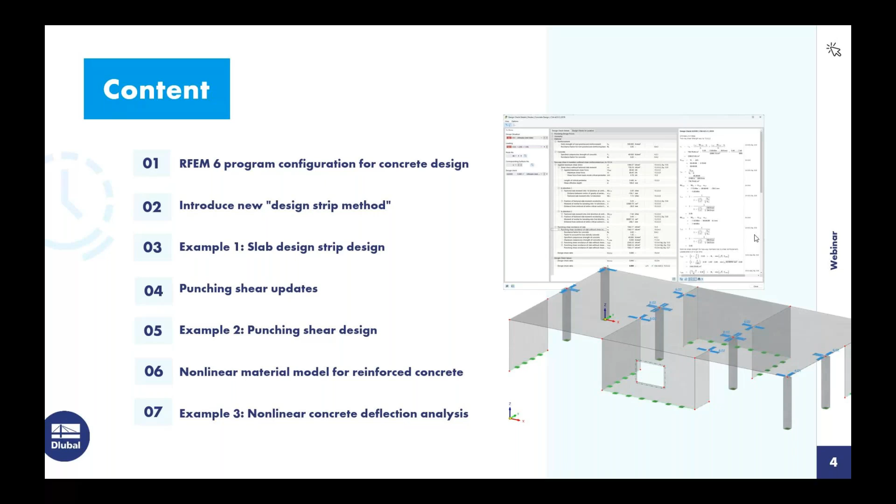So for those of you joining us today who are not familiar with RFEM and our concept, we do work with add-ons. So when we look at the base program RFEM 6, this allows us to fully model our structure. We have access to all of the materials, the cross sections, not only for concrete, but all of the other materials that we offer as well to get a full analysis. But when we want to carry out the design, for example, of our members or our surfaces, we do need the concrete design add-on. And this includes the ACI standard, the CSA, and other international standards.

We also have the building model add-on. So this is going to be used in conjunction with the concrete design add-on to carry out the reinforcement design of these building specific features such as shear walls or deep beams, otherwise known as spandrels. So we won't be getting into this add-on today, but I did think it was worth mentioning. We have a previously recorded webinar that goes into much more detail that you can refer to on our website.

We also have the nonlinear material behavior add-on. We'll see this in our third example today, but this is going to allow us to consider the nonlinear behavior, again, of the concrete and the reinforcing steel directly in the analysis. Now, there are many more add-ons that could be applicable that we offer, for example, construction stages analysis. We'll briefly mention today the time-dependent analysis that might be interesting for concrete design for a more detailed creep and shrinkage analysis. So you can refer to our website to see a list of all add-ons available as well as their functionality. So moving on to our first topic today.

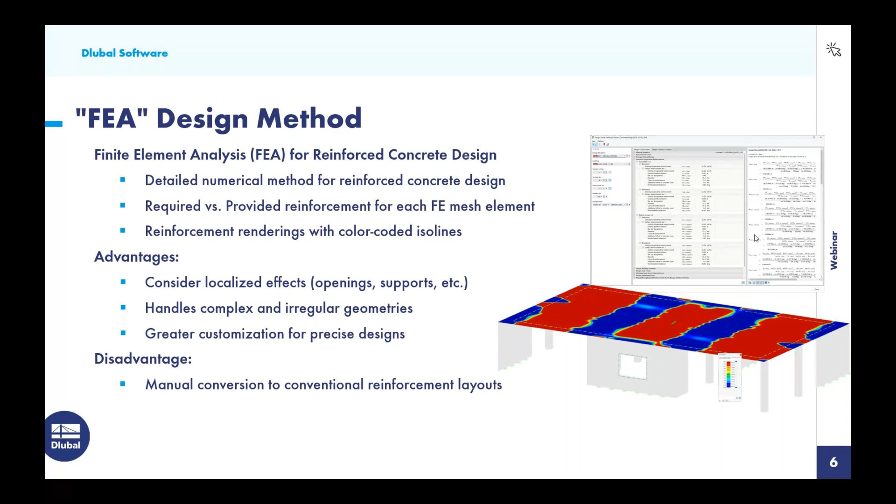Now, the disadvantage we could argue here is that it's not great for reinforcement layouts, that we have to take these color-coded isolines and somehow convert them to standard reinforcement layouts that we would want to include in our detailed drawings or output.

So therefore, we're excited to announce that we now offer this alternative method, the design strips. This is a simplified approach to reinforced concrete design, where essentially we take this surface or slab element, we divide it into strips, and these strips can be generated automatically according to the standards, or we could manually generate them as well.

What's happening underneath the hood is that we're using this RFEM member type called a result beam. And a result beam is going to sum up the internal forces such as moment and shear across the width of that particular design strip.

Now we can further take the design strips into the concrete design add-on within RFEM to carry out the full reinforcement design. Again, a little bit more simplified like a member as opposed to this FEA approach.

So the advantages here is that it can be very efficient and straightforward for standard slab geometry. When we have very rectangular type surfaces, this could certainly be a very easy way to carry out the design. It's also widely accepted and will produce standardized reinforcement layouts.

And we'll see this in our example today, just how the output of the reinforcement can be a little bit more user-friendly. The disadvantages we might want to mention here is that we assume uniform behavior across the strip width.

So we're kind of averaging out or summing up those forces across the entire strip width. So we're going to ignore localized stress concentrations or significant variations in the stress distribution. So perhaps we have an irregular slab, areas with complex openings, complex geometry, non-uniform loading, where maybe we really need to focus on the details at some of these locations rather than averaging out over the entire strip width.

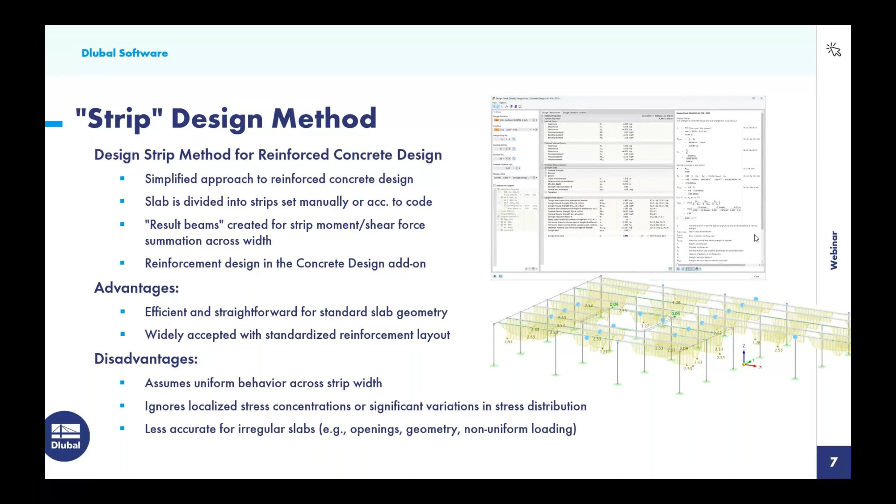So with that said, we will move into our first example today. I will begin here within the program RFEM and opening up the base data dialog box. This would be the dialog box that would be available when we create a new model.

Under this second tab are all of the various add-ons. So essentially you're creating this custom software package that's specific for your design needs. We will be utilizing the concrete design add-on here, so it's currently activated.

And then under the third tab, this is where we can set our standards. So we can generate the load combinations automatically according to the ASCE 7, the latest 2022 standard. And we will be carrying out the concrete design for this first example according to the ACI 318, the 2019 standard, but notice the CSA is also available within this dropdown.

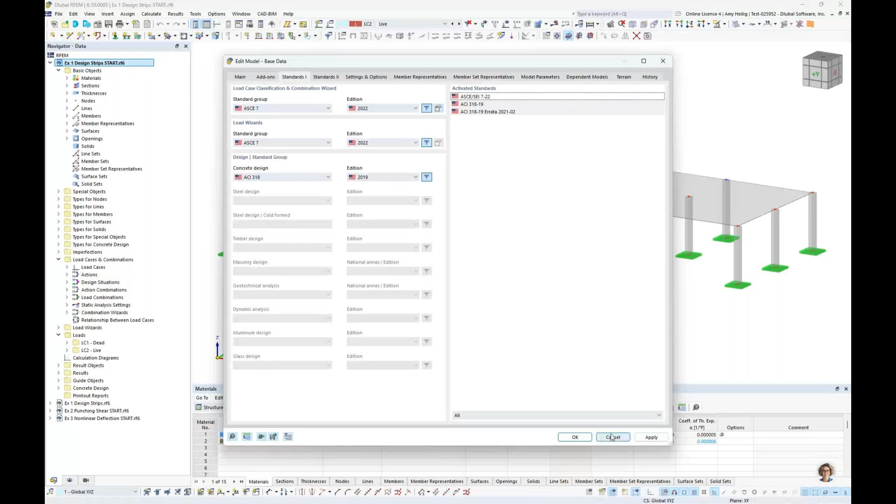So once this information has been set, let us just do a quick model review. Looking at the materials, standard 4000 PSI concrete is applied to this general structure over here. And we have just a single surface element.

We have our columns laid out for the 4000 PSI concrete, pretty uniform, pretty standard geometry here. Looking at the thickness of this surface, it is going to be 12 inches.

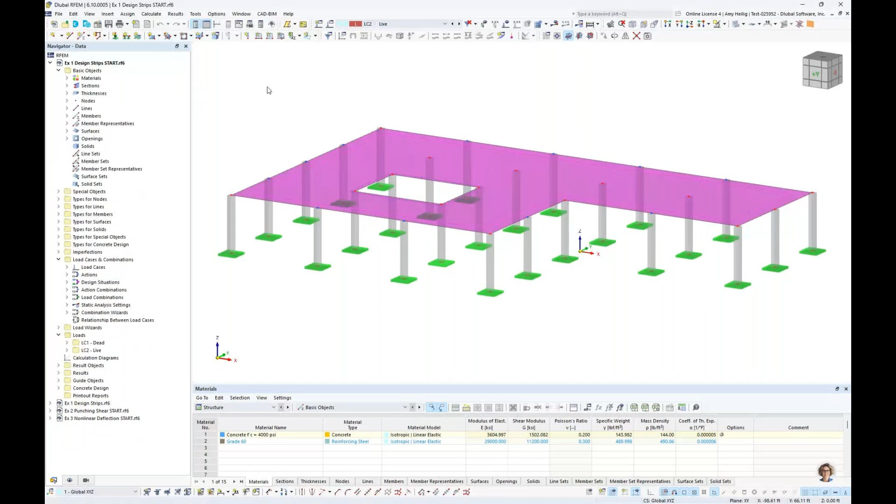So looking at the loadings now, just a couple of very simple loads for today, gravity only applied to the surface element directly. So we have here a dead load. It is considering that opening there in the center, 0.1 kips per square foot. And then I also have a live load applied.

And rather than applying the live load to the entire surface, I did take advantage here of the loading options, new free rectangular load. So this allows me to place loads on various areas of the surface without applying it to the entire surface itself.

So going into the load cases and combinations dialog box, we are generating the load combinations automatically according to the ASCE 7 with this combination wizard turned on. We can always deactivate this if we would like to manually create those load combinations.

But here are the separate dead and live load cases. Notice self-weight is activated for the dead load case only. But one other thing I wanted to quickly point out here is this structure modification is activated. So this all has to do with the I crack factor that is required from both the ACI and the CSA standards to be applied to members and surfaces.

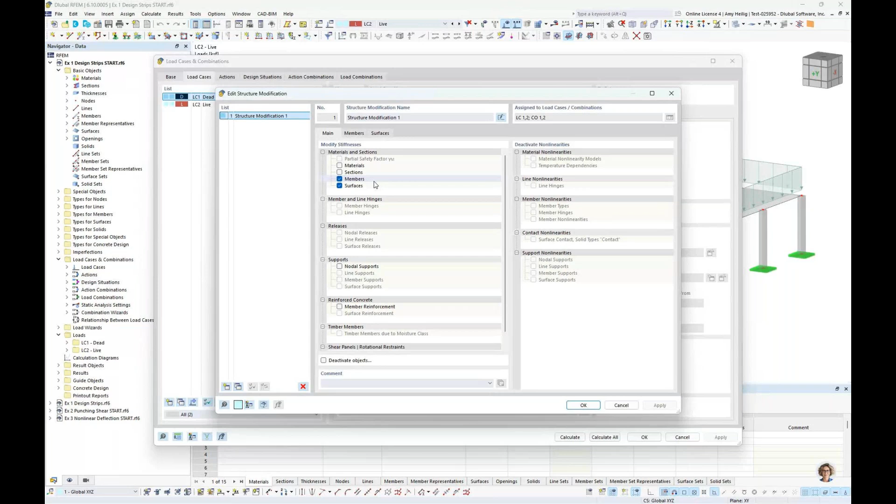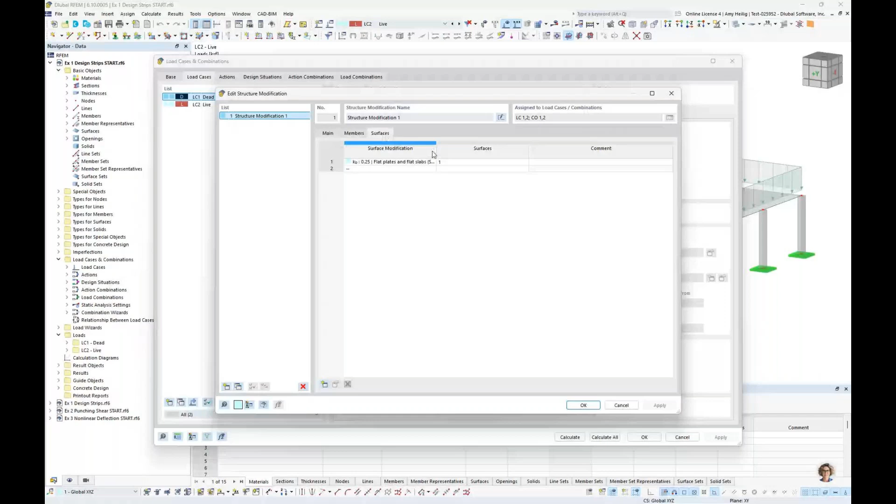I have already created this I-crack factor to be applied to the column stiffness. You can see ACI selected directly from the dropdown. We also have the CSA standard, where this bending stiffness multiplication factor of 0.7 is applied to the columns. We also have the I-crack factor applied directly to the surface, with ACI selected from the dropdown and the bending and torsional factor set to 0.25.

Now that those structure modifications have been set, we apply them to the load cases. Under the design situations, we generate two design situations according to ASCE 7: factored load combinations for the strength limit state design, once we get into the concrete design add-on, and unfactored load combinations for the serviceability design. I have activated the structure modification for the I-crack factors only for the factored load combinations, not for the serviceability load combinations.

Jumping to the load combinations themselves, a very simple example today: two load combinations, with the structure modification activated for the factored load combination, and the unfactored load combination belonging to that second design situation.

Now that we have done the model and loading review, we want to move forward with generating the design strips. What we need to do is activate a building grid. This 3D building grid will help guide the program in automatically generating the design strips for us.

This is not to be confused with our drawing grid, which we normally set visually to help with modeling. Rather, under the guide objects, you will see the building grids available, where we can right-click to create a new building grid definition. There are some other building grids set by default in the program that we could use and modify, but I just created a new one.

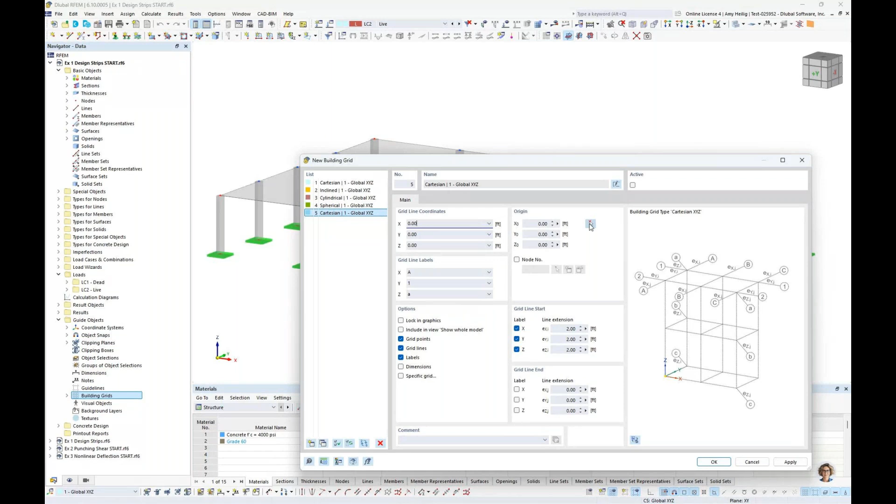This is going to be in 3 dimensions, aligned with the global XYZ axes in the model. The first grid line in the X direction will be set at 0. We also want to set the origin point—rather than the point 0,0,0, I can graphically select this point in the lower left of the structure, and now we see those coordinate points populate here.

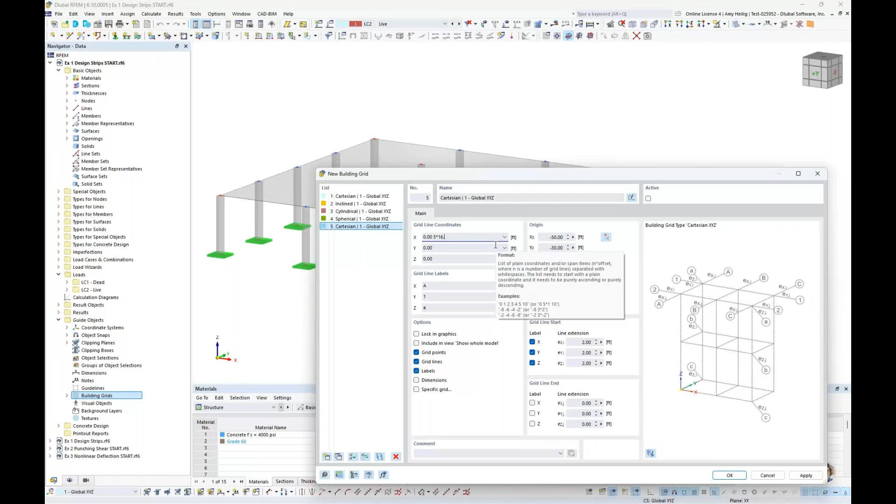We start off with the point 0 in the global X direction, and then I'm going to have 5 more lines spaced every 16.6667 feet. These columns are laid out identically here at approximately 16.67 feet, so we can create those additional lines in that direction.

Same concept for the global Y axis: our first line will be at 0, and then we'd like 4 additional lines at 12.5 feet. Finally, in the Z direction, we have 1 line generated at 0, and then vertically, 1 additional line generated at 10 feet, which I can just type in directly.

Once we are done defining this, we see that 3-dimensional building grid laid out here. This is required in order to move forward with our second step of generating the design strips.

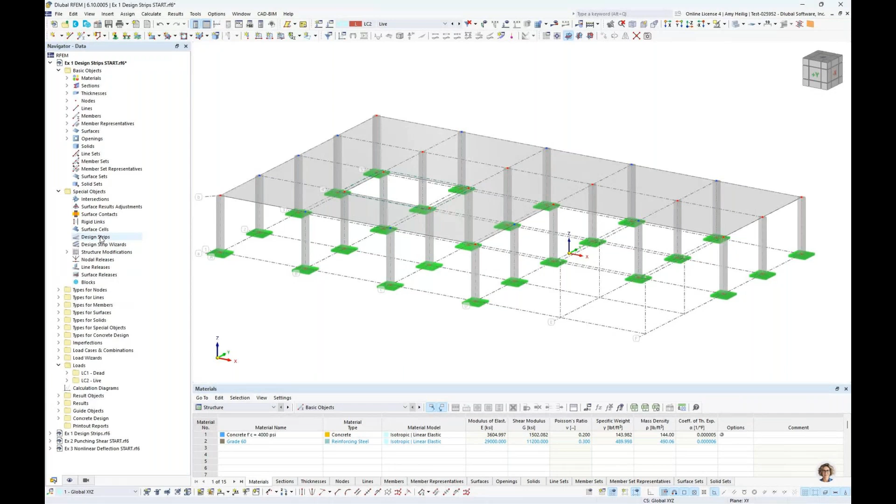The design strips are created directly in the base program RFEM—we don't necessarily need the concrete design add-on yet to generate those. Under the special objects tree, we see this new design strip wizard. We go ahead and double click on this, and you'll notice the program asks for the building grid we just created to be selected within this dropdown.

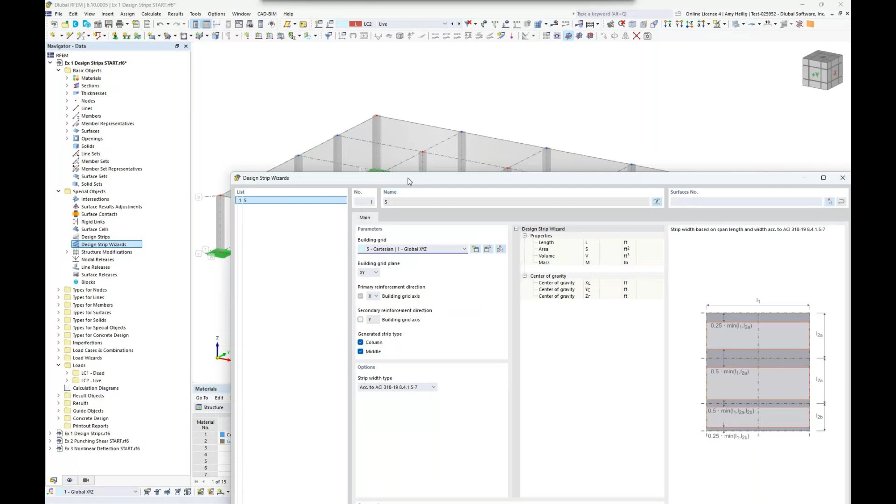We want to generate these design strips according to the building grid plane XY, or the plan view looking down on the structure. We have the ability to generate design strips in two directions, which would be something we'd want for our reinforced concrete design of the elevated slab. But for this example, I'm only generating the design strips in one direction, the building grid axis X. The generated strip types will include both the column and middle strips.

Within this dropdown box, we have the ability to generate the design strip width according directly to ACI section 8.4.1.

And this picture will dynamically update depending on which option we have selected here, but it is going to refer to the span widths in both directions, which is directly set within the ACI. We will be adding the CSA standard within this dropdown as well. Just for your information, it's identical to the ACI, but nonetheless, we will add it here within the dropdown.

We can also select here based on the span width. You can see how the picture updates here to generate the width based only on the span in one direction, or we can choose user defined. So if you want to generate the same width strips throughout the structure, you can just directly input in that strip width. So moving forward with the ACI 318 today, we do want to tell the program which surface to

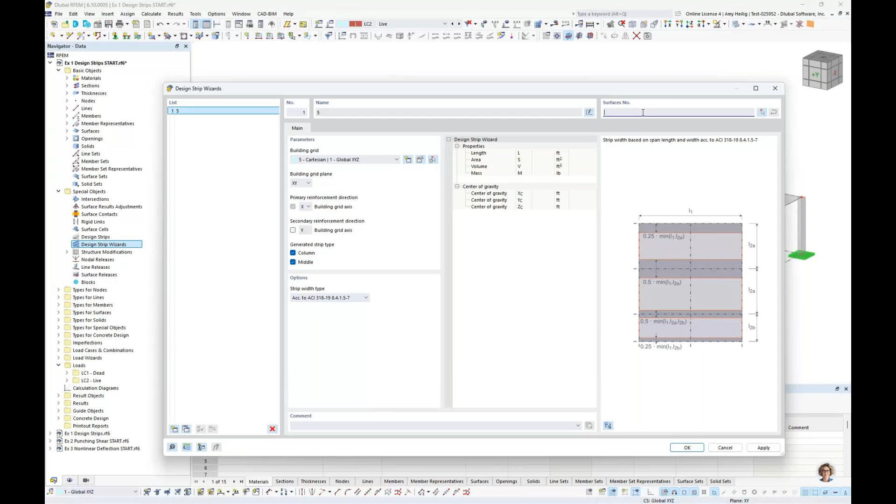apply this to. So we can graphically select here surface number 1 or simply type it in. We click OK, and now we see those design strips generated here. All the design strips are listed right above it in the design strips tree.

So if I wanted to make any modifications to each one of these design strips, they're currently tied to the wizard. So that's why they're shown here in purple. If I wanted, I could always right click to disconnect the design strips, and that will allow me to individually modify, for example, the width of any of these design strips if I wanted to make further changes.

So what's going on in the background? Well, with one of these design strips, if I double click on it, what it's essentially creating is the member type design strip here. And it's not editable. Again, that wizard has created this specific member type, but it's really doing exactly what I mentioned in the PowerPoint

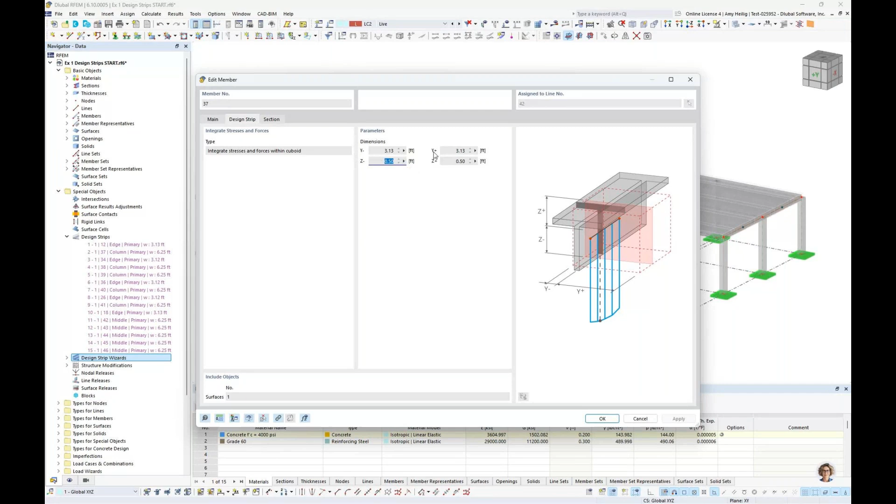with the result beam. So this is another member type we offer in RFEM called a result beam. It is summing up those internal forces over the strip width and also considering the thickness of the surface here, all automated. So that's how the design strip is being generated here with that particular wizard.

So if we go into the design strips dialog box here, again, these were all created by the wizard. If we wanted to create additional design strips, we could in the lower left-hand corner. This allows me to set the strip width individually. I could then graphically select the line.

So we must have the line drawn across the surface to assign this design strip to, as well as the relevant surface. So that is an option here if perhaps the wizard didn't capture all the design strips that we wanted for our particular surface.

So looking at all design strips at once, we're going to carry out the reinforcement design utilizing the concrete design add-on because this checkbox is active. So we then have this second tab available to us here. And this is where we set the reinforcement for both the top and the bottom of these design strips.

So starting off first with the top, we can automatically determine the number of bars that will be needed at the top portion of this design strip. Perhaps though we do want to specify the bar number, so we'll select number 6s here.

We also can automatically determine the spacing, and we can control here the parameters for the spacing for the program to help determine this. For example, we can set here the minimum spacing between our reinforcement to 3 inches, maybe the maximum spacing is 12 inches, and the increment is every 1 inch. And we can click OK. So that will be applied to all of our strips here.

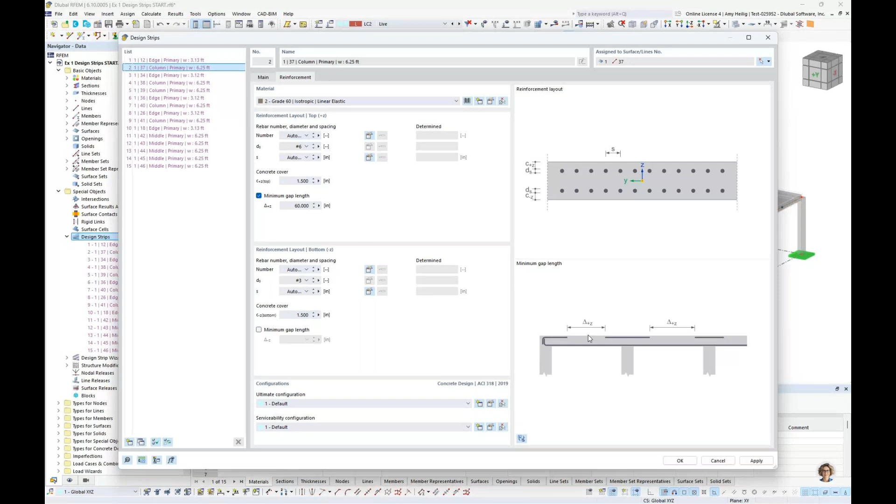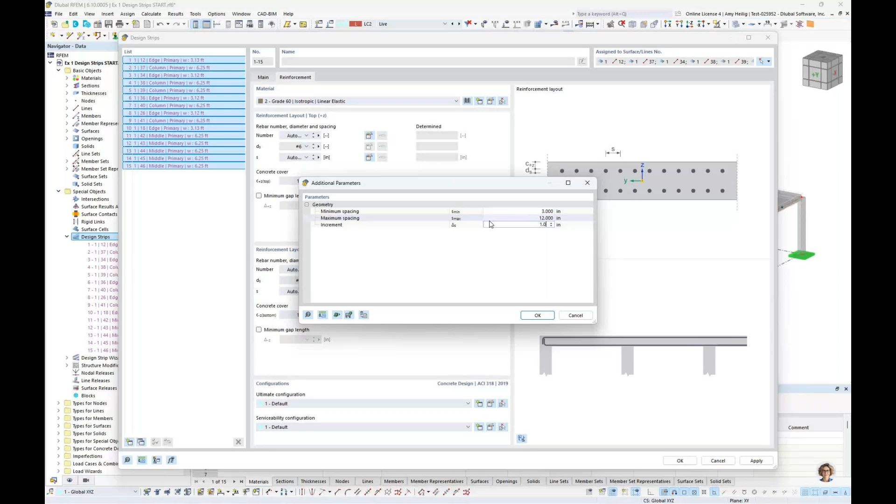Now, if you want continuous reinforcement across the entire top, we would go ahead and turn that off here. Now, looking at all of our design strips together again for the bottom reinforcement, exact same concept here. We will select number 6s if we wanted to modify the spacing parameters to 3 inches as the minimum, to 12 inches as the maximum, and to optimize with 1 inch spacing increment, we can click OK, and I want continuous reinforcement across the bottom.

So here are the configurations, and the configurations when we run the concrete design add-on are always applied to members, to surfaces, to design strips.

We'll see this in our next example with punching shear. This is just going to be information that is specific to the standard we have selected, which is currently the ACI for the ultimate limit state design. And the design strips are designed here according to this first tab for members. So for example, if I'm not so interested in considering the torsional moments within these design strips, it's not so important for my surface design, we could completely turn that off here. All the rest pretty self-explanatory with code references that we can make modifications to here.

Looking at the serviceability configuration. So this just has everything to do with our serviceability design once we do get into that add-on. For example, crack widths. Perhaps I don't want to calculate the direct crack width calculation according to the Gergely-Lutz equation, but rather I would just like to use the reinforcement requirements directly from the standard. We could go ahead and turn that off and leave this top option checked. Also, some limiting deflection ratios are also set here within these options.

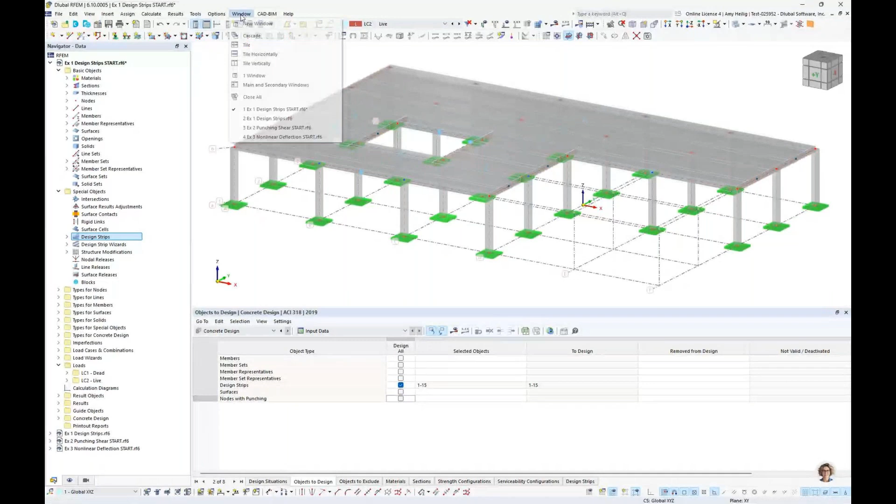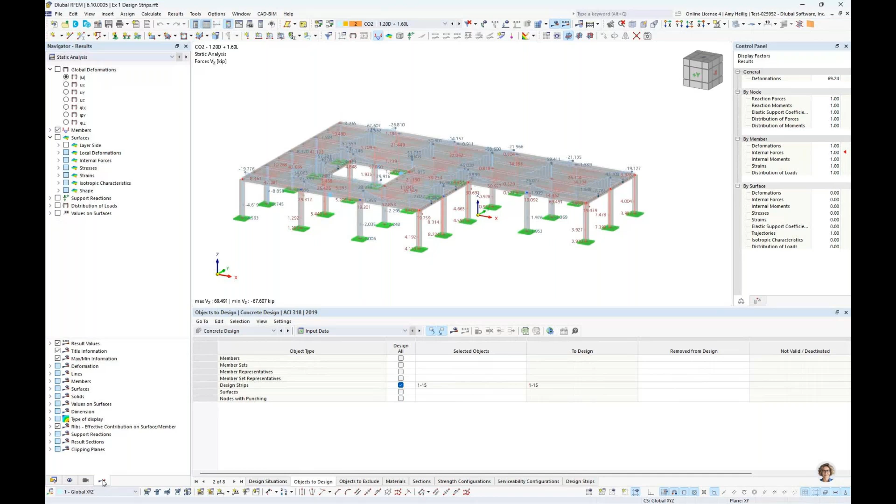I will jump to an already saved model. It doesn't take very long to solve, but just for the sake of time, we'll jump over to the calculation already solved here. So once this calculation is complete, let us take a look at first the analysis. So we can take a look at our factored load combination here, the dead plus the live load. And we have a new tab available in our navigator over on the left where, for example, we can view the analysis results such as the deformation.

But we're really interested in those design strips. So remember, we're technically treating these as members running along the length of the slab here. So therefore, we can activate the member internal forces for the entire model. And I'll go ahead and create a user-defined visibility here only for this top portion. So what you'll see here is that we can activate the member internal forces, such as the bending moment. So again, these bending moments are determined because they are summed up across the entire strip width.

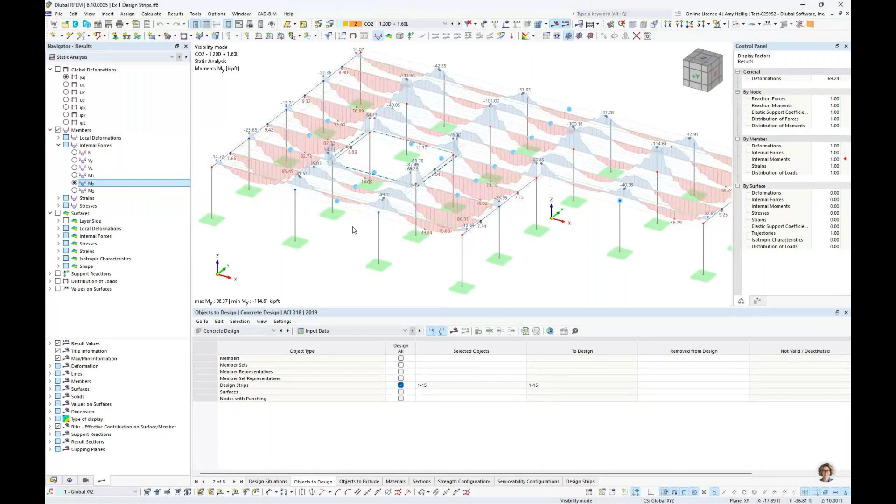So it's real easy now to determine here the total internal forces from this analysis of load combination 2, kind of represented here as a member along the design strip length. We can also take a look at the shear forces, and as expected, we have higher shear forces maybe where these columns are located or at the opening edges, but again, summing up those internal forces across the design strip width. So now we would like to turn to the concrete design results.

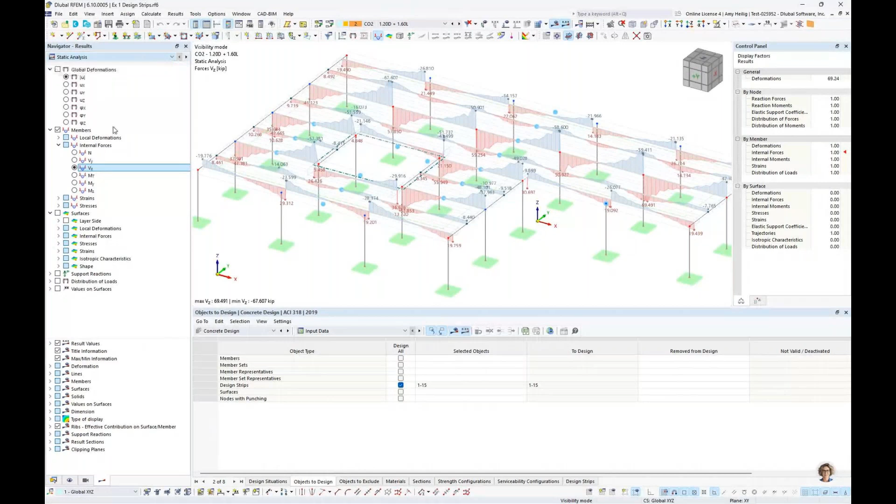So in our navigator, we can use this drop down. So not only are we interested in the analysis, but now we turn to the actual design according to the ACI standard. So under the concrete design table, we can view the design ratios on the design strips themselves. And what we will see here in table format is we certainly do have some design strips that have some failing checks, and no surprise, it's the shear strength, pretty close to some of where these columns are located. This is actually something that we would address later on when it comes to the punching shear. So these failing design checks are nothing to be concerned with now, but rather we'd be more interested in maybe the flexural design checks that are also given.

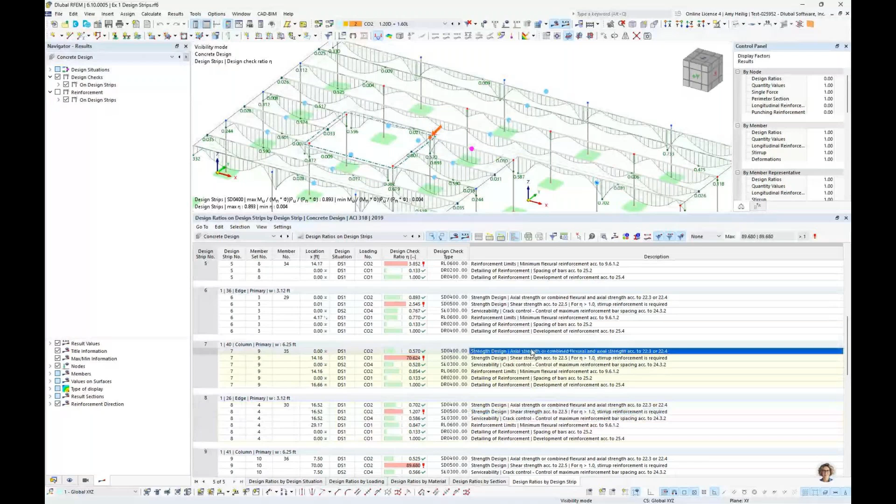So with each design strip, as we can see, the program will kind of highlight which one we're currently looking at. We can always access the design check details. With the design check details, we can zoom in here. This is going to show us the formulas line by line and ultimately how we have calculated this design ratio for this particular strip.

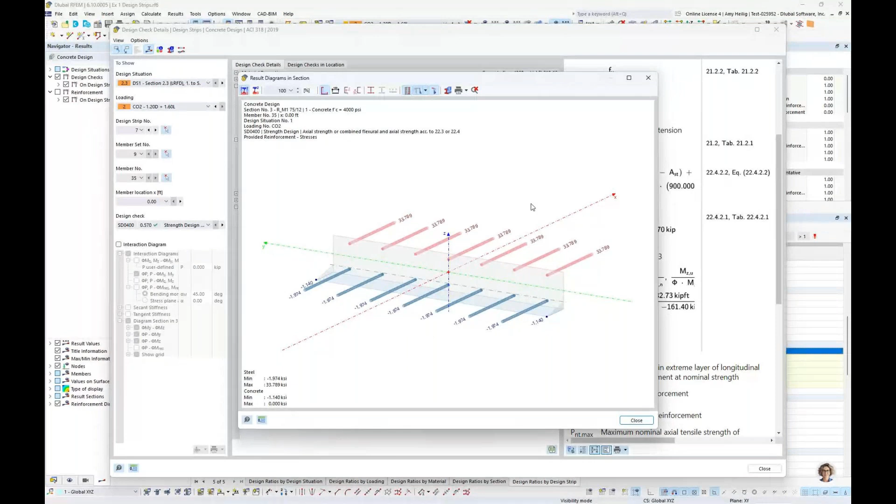All the information is also shown in table format, and we can even pull open a cross-section view here of that strip to view the reinforcement at the top in tension, and the reinforcement at the bottom in compression at this particular area, likely located over our column.

So that's a little bit about the table options that we can view here for our results of the design strips. Keep in mind that everything is also visible to us here graphically. So we can activate here the strength limit state checks directly within the model to see the design ratios along each one of these design strips. We also can view here the reinforcement.

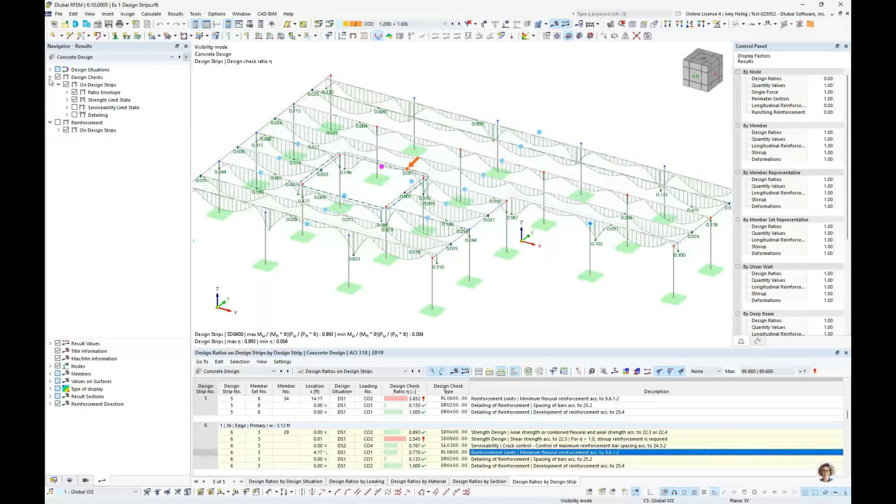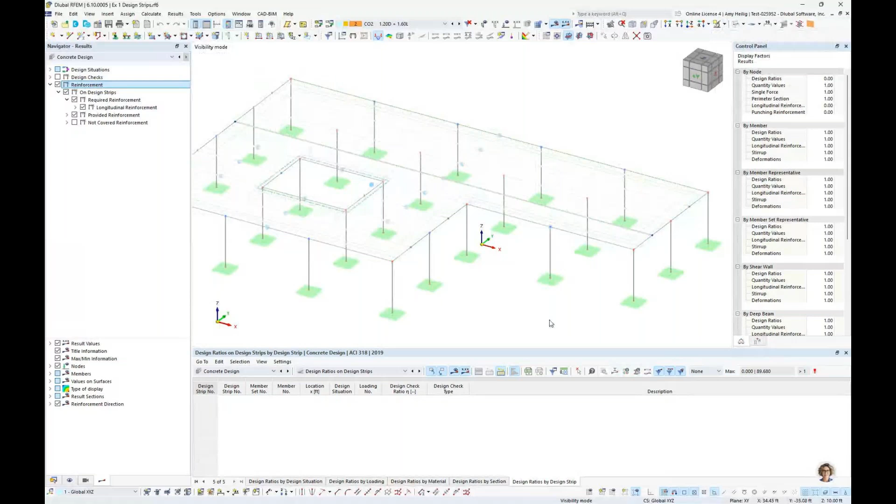So if we activate the reinforcement here, I'm actually going to choose one of these design strips and we'll choose the visibility based only on this particular design strip. And let me cancel out this visibility. We'll try that one again. Okay, and it's still not activating, give me 1 second. What we want to see here is the required longitudinal reinforcement specific for this design strip.

So we can also jump down to the reinforcement on the design strips in table format. And the one that I'm most interested in is number 14 here. So with this particular design strip running between these two columns, we can activate the required longitudinal reinforcement for the top of this design strip. So we can see here along the length what the required reinforcement is.

And with that we can overlay here the provided reinforcement. So the whole goal is that the provided reinforcement is greater than the required reinforcement. And in table format, under the reinforcement on design strips, we can see here that 7 number 6s are provided for this particular strip.

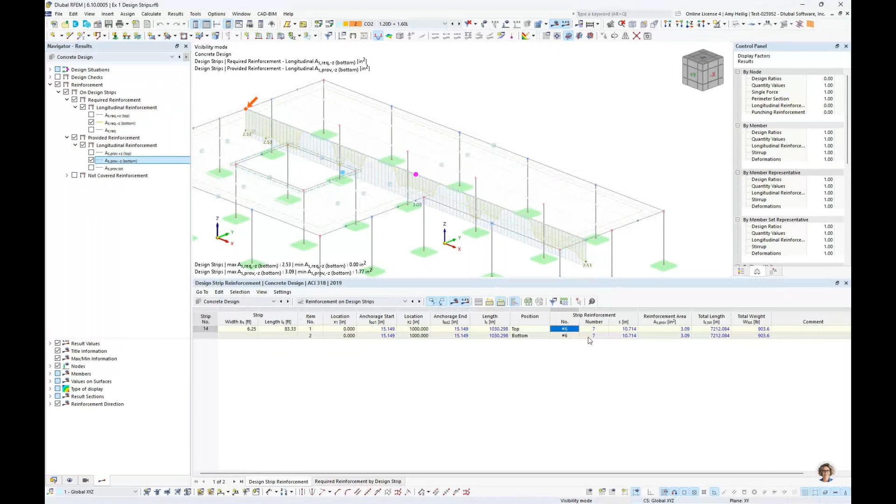Taking a look here at the bottom reinforcement instead. So again, we see the required reinforcement from the analysis displayed graphically here for design strip number 14. And we want to overlay on this the provided reinforcement. This is also 7 number 6s that the program has determined. We can see that this value is greater than the required reinforcement. So everything looks quite good here.

Again, if we cancel out of this visibility mode, we're going to see all of the number 6 bars, the numbers, the spacing that has been generated by the program automatically with the strip design. Also, material takeoff is available in this table format that we could export directly to Microsoft Excel with this button here. Okay, so that is a general overview of the new design strips and how we can carry out the design according to the ACI or CSA standards.

We're now going to turn to our second example to discuss punching shear. So with the punching shear design, we are referring to ACI 318, section 22.6 for two-way shear strength. When it comes to the CSA, we're referring to clause 13.3.2 for one-way and two-way shear.

As I mentioned earlier, we have carried out the punching shear design for quite some time in RFEM and the concrete design add-on, but we were only able to do this without the two-way shear reinforcement considered. So we would just flag you as a user if the strength of the concrete alone was not sufficient, but had no way to really address that further without the input of the shear reinforcement. But now we have that ability to define that here at the punching shear nodes.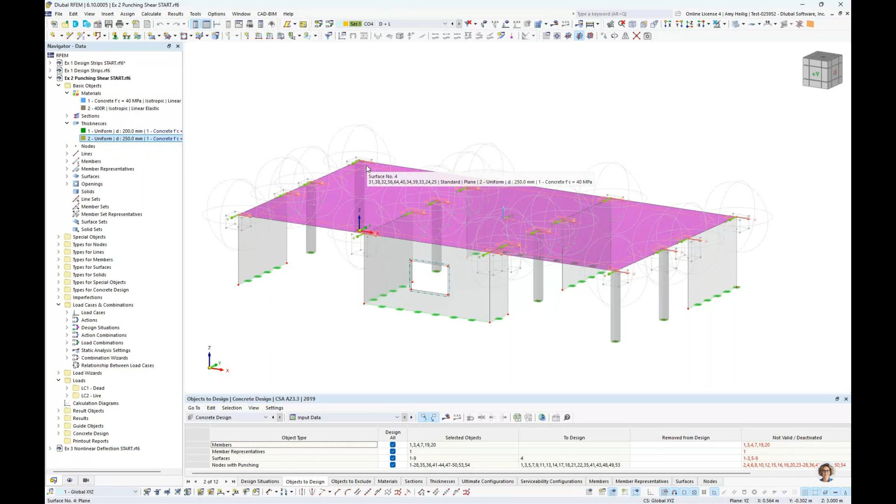But because I'm going to carry out the design according to the FEA method of this elevated slab, inevitably we're going to have what we call singularities. And singularities are not unique to RFEM. They happen in all FEA programs.

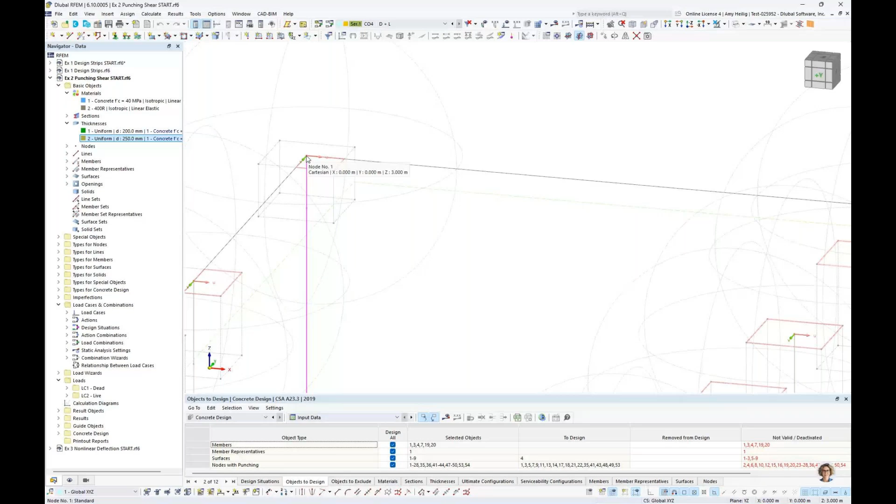And the reason why is because we have these column elements, for example, that are framing up into the 2D surface, and all forces are being transferred at this single FE mesh node. But we know in reality, we're certainly getting better load distribution than just that single mesh point, because our column is certainly going to have dimensions here. So what tools do we have in RFEM to address these singularities?

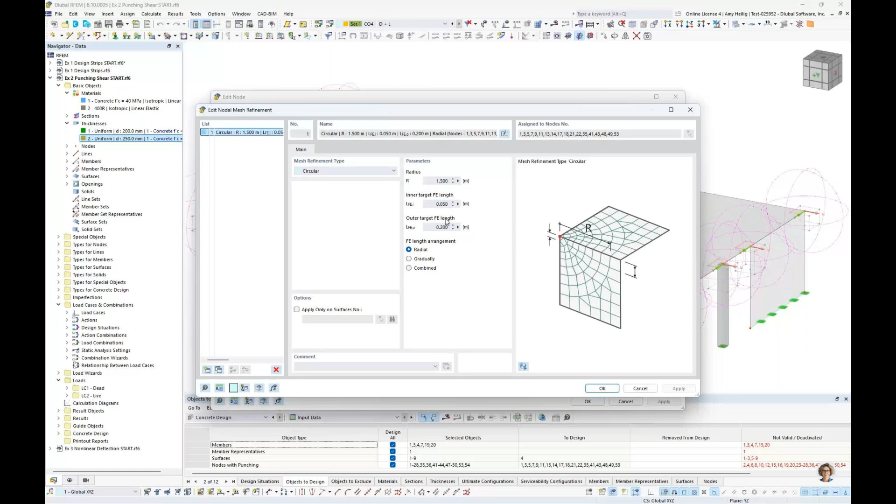Well, the first thing that I did is I selected multiple nodes at once. And if we double click them here, I've added in a mesh refinement. So we have the ability to add in mesh refinements for different objects in the model, including nodes. And we can take a look at here that I applied this single definition to multiple nodes where I have a radius set. I have an inner target FE length of 0.05. The outer is 0.2. And again, those were applied to all of the top nodes that you see here with the symbol shown.

What else you will see is the symbol shown here at the wall edges as well as the columns that are called our surface result adjustments. And these are given here under the special objects tree. We can see the surface result adjustments listed. I just created one definition type to begin. This allows me to average out or to smooth out the internal forces over a set dimension here.

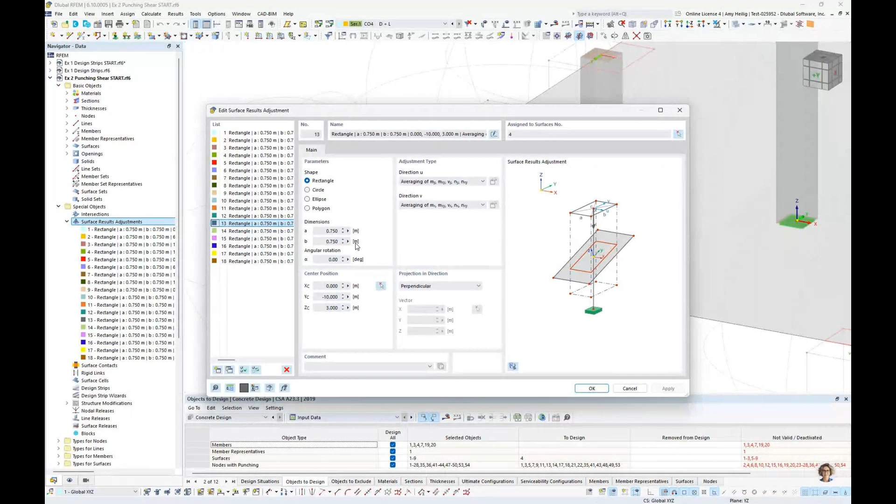So this is actually considered when we take this into the concrete design add-on, that we can average out the moments, the shear forces, whatever we want over this dimension of 0.75 meters by 0.75 meters. Again, this just helps with those non-realistic singularity issues where these elements are framing into the 2D surface. So we create one definition and it can be copied multiple times to different locations here on our elevated slab.

If we're curious to see the generated mesh, we can go ahead and calculate that quickly. Again, taking into consideration the FE mesh refinements, we see everything is generated by the program automatically. So I'll go ahead and turn off here under the types of nodes, the mesh refinements. I'm going to also turn off the surface result adjustments and the mesh all graphically, just so that we get a nice clear picture here of the model within RFEM.

The final thing to quickly cover is just the loading. And this is really identical to what we saw in the previous model. We just have a simple dead load applied here of 3 kilonewtons per meter squared. And then I also have a live load of 6 kilonewtons per meter squared, again, applied to the entire surface here. The load combinations are generated according to the NBC standard.

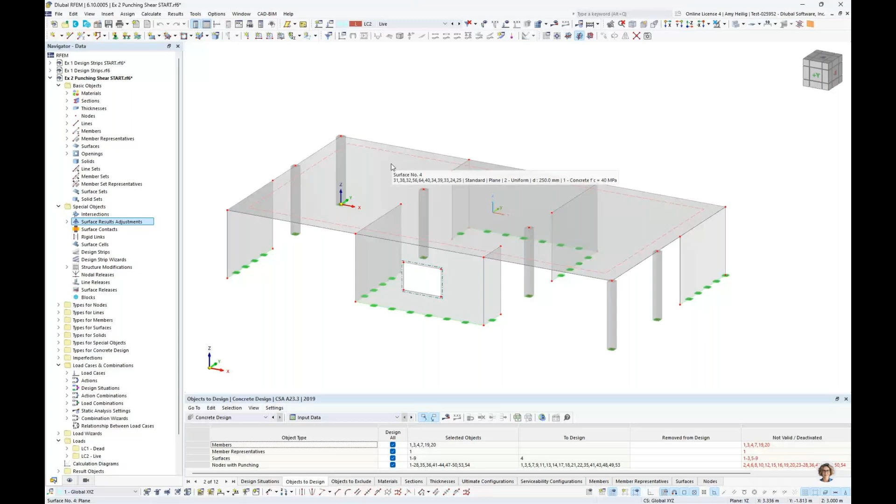We have here our factored load combinations in red. We have our unfactored load combinations in green. The crack factor was also applied to this structure. So again, no need to review that again because it is the same as example number 1. Now we have activated the concrete design add-on. So when I double click on this elevated surface, you can see here the design properties is activated.

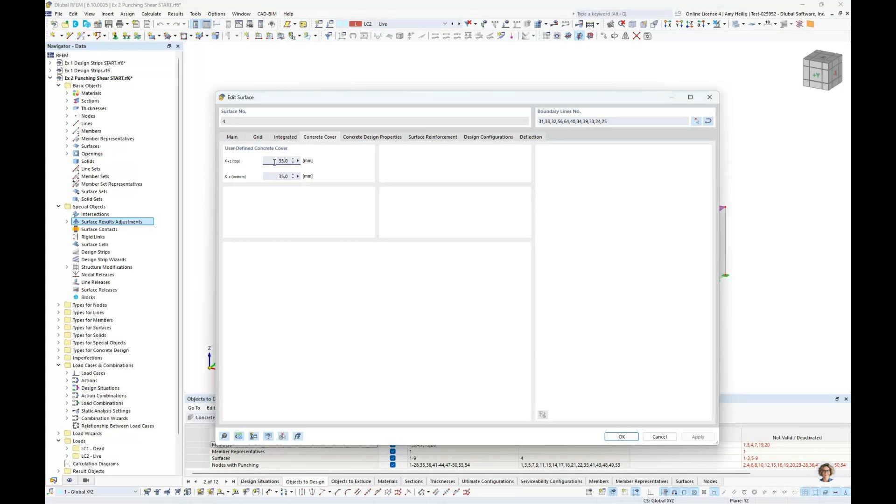We will carry out the design of this surface, which gives me some additional options here to input the reinforcement directly for this elevated slab. So again, I'm just going to briefly cover this. The previous webinars go into much more detail on how to define member and surface reinforcement. But as a brief overview, we can input the concrete cover, and then you can see within the drop-down here, I have applied this reinforcement.

So again, kind of taking this FEA approach rather than the design strips. We have 25 bars spaced at 0.15 meters for both top and bottom and in both transverse directions. This is applied to the entire surface here. The reinforcement type is set to rebar, but we also offer the welded wire mesh options.

Stirrups are also available here, but I think most of us try to avoid stirrups with any type of surface design, and we will address the shear in this example a little later on with the two-way punching shear reinforcement that is not defined here within the surface. So again, this is strictly for the surface element itself.

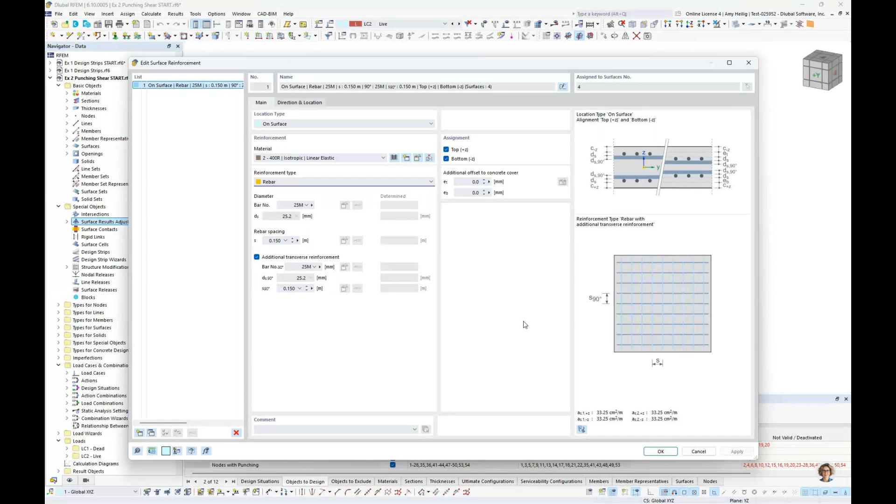So now that we have input that reinforcement, let us take a look at these nodes at the top level. When I highlight all of my top level elements here, including the nodes, I can double click them, and you can see that this is where we can consider the punching shear, with the node directly. The program allows us to activate the punching design, again utilizing the concrete design add-on.

And under the concrete design, this is where we can define our reinforcement. But I first want to carry out the design without any two-way shear reinforcement, so I only want to look at the strength of the concrete first. Then under this fourth tab, we have the configurations. As I mentioned, this is very similar to the design strips. Every element that we design will have its own configuration settings, including punching shear.

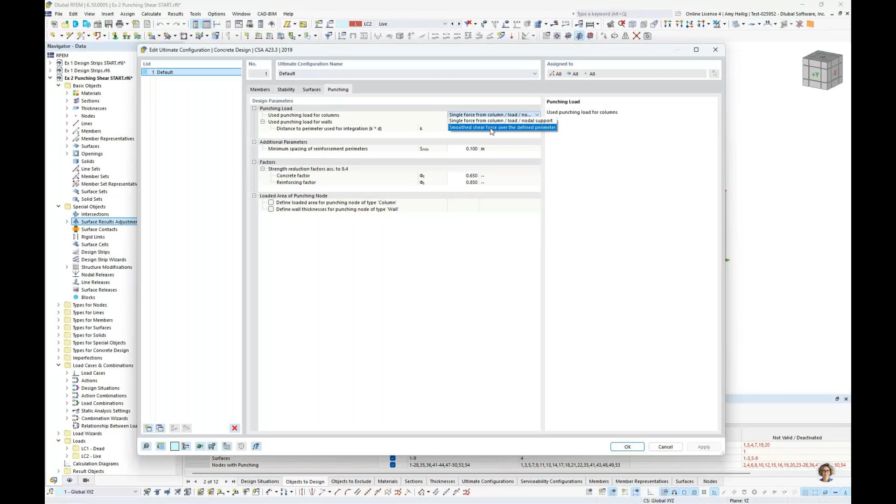What is worthwhile looking at here for the punching shear is that this top section asks us what we want to use for the punching load. For example, the columns: do we want to use a single force, or do we want to smooth out a shear force over a defined perimeter area? We'll go ahead and just use a single force from the column. Same concept here with the wall. We will smooth the shear force over this defined area.

Down here at the bottom, this is also worth discussing further, and you can see that these options have a nice long note to really explain exactly what you're setting. In our model today, we have a 3D structure. We have modeled the columns framing up into the surface, and we've modeled the wall elements. Therefore, the program has the intelligence for the punching shear design: it knows the dimensions of the column framing up into the elevated slab, and it knows the dimensions of the wall element.

If we were instead modeling a 2D slab element, so we just have our slab element directly modeled in RFEM, and we're representing our columns with nodal supports or our walls with line supports, then we would want to take advantage of these settings at the bottom. This allows us to input the dimensions of the loaded area for the punching node type column, or for the wall element, we would need to give the wall thickness. So it's only if the program doesn't know this information from the 3D model.

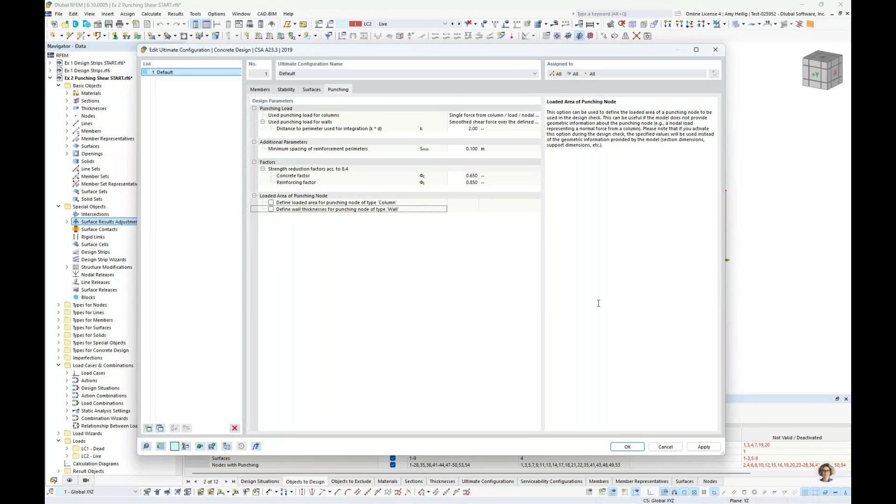If you do have a 3D model and you activate this and input this information, it will override what is modeled back in RFEM. So it won't refer to the physical object, but rather to these user-defined options. But because we have a 3D model, we'll leave these options off for today. Once we are done with these configuration settings, we are ready to carry out the design, so we'll click OK through these dialog boxes.

And under the concrete design, exact same workflow as what we saw before. We're relating our factored load combinations in the first design situation to the ultimate limit state design according to the CSA, and we have our unfactored load combinations for our serviceability design situation for the serviceability limit state. Under the second tab, again, the program assumes we want to design everything.

We don't want to design the members here. I'm not designing all surfaces, but rather I only want to design surface number 4. And I don't want to design all nodes. Rather, I'm going to graphically select only the nodes that are located at this top elevation.

Okay, so now that this input is done, we can go ahead and run the design. So notice that the program will go ahead and calculate the load combinations for the analysis back in the main program first. And once it's determined these forces, we go into the concrete design add-on to carry out the CSA design checks for both this elevated slab, according to this FEA approach, as well as the punching shear checks.

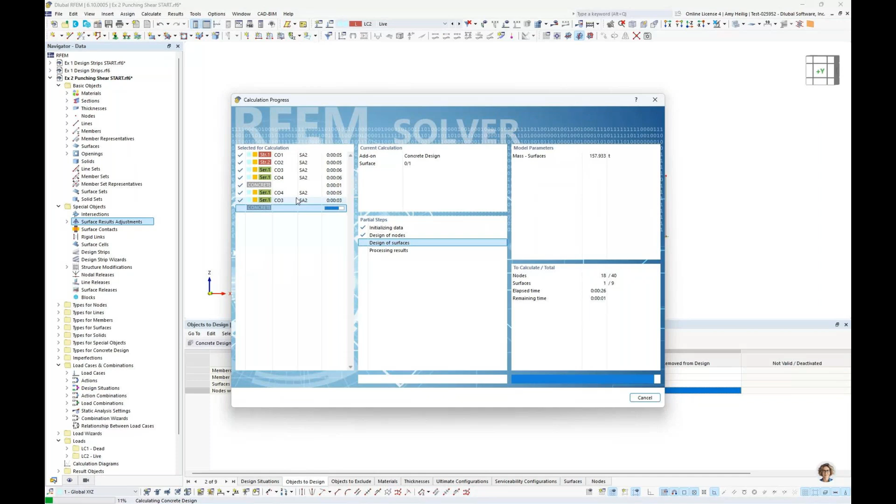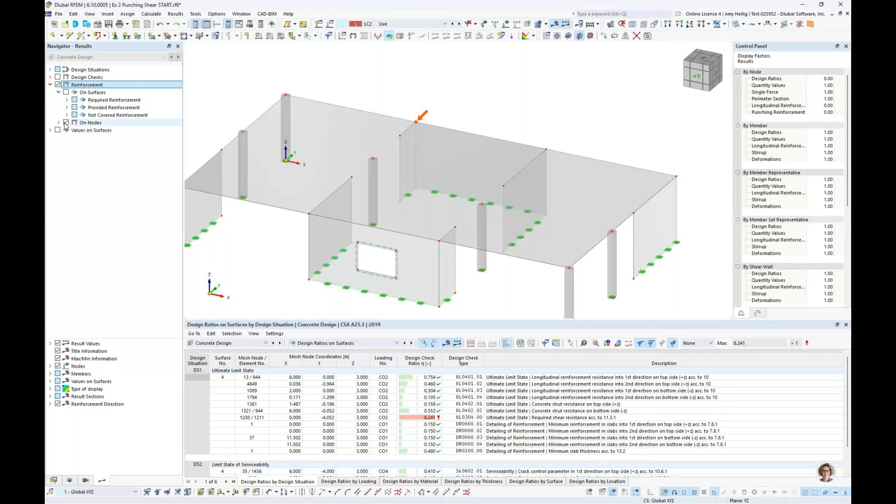So we will now be presented here with our results, and we can jump down to the design ratios on the surface. I think it's worthwhile just comparing this quickly to our previous example that we did with the design strips. So I'm going to activate here the required reinforcement of my surface. So when we drop down to the design ratios on the surfaces, you can see here the different design checks that we're carrying out in comparison to the design strip.

So it looks a little bit like a longer list here for our strength, serviceability, and detailing checks. Again, for each one of these, though, we can always access the design check details. And because we're not taking this simplified approach, but rather this more precise approach, which I think is pretty evident with the equations that are shown here within the design check details, ultimately we can see how this design check ratio was calculated for this surface element for each one of these checks.

And again, no surprise, we have some failing checks here at the column. So we are checking one-way shear for the surface elements at these columns. And this is, again, nothing to worry about right now with the surface because we want to alleviate this with our two-way punching shear checks with our nodes that we have just input.

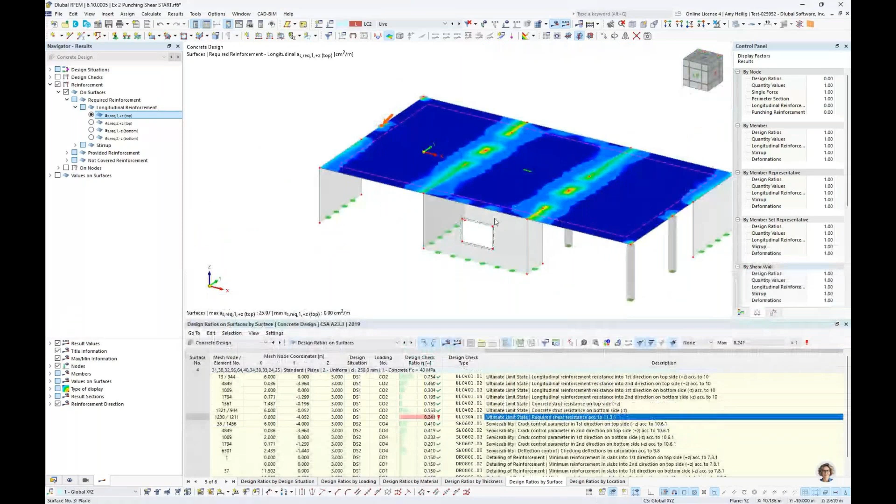But when we look at the required reinforcement of our surface element that we can activate graphically within the concrete design add-on, we can see the required reinforcement with these colored ISO lines for the top direction in the global X axes, in the global Y axes, also the bottom reinforcement. So you can see how this can certainly be an advantage for a much more precise, detailed calculation for the required reinforcement of our surface in comparison to the design strip. So I just wanted to quickly mention that before we move on now to the punching shear.

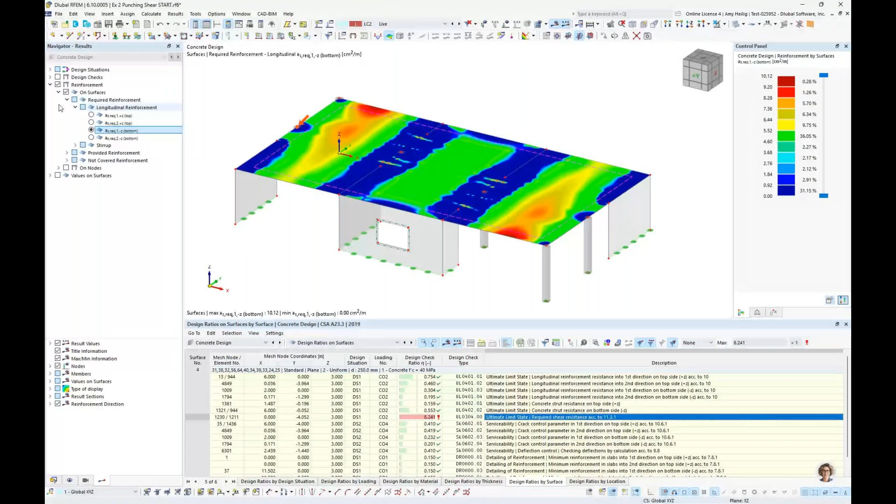So with the punching shear, we will go ahead and take a look here under our table options at the design ratios on the nodes. And we'll go ahead and expand all the options here. Maybe I select only this top surface and we'll turn this into elevation view or plan view here.

So with our punching node design, remember we're carrying out the design here at every single node location at this top elevation. Looking at the design ratios, you'll see these for each one of these nodes, and the program will give you a nice arrow here showing you exactly which node you're looking at. We are carrying out the two-way shear strength as well as some additional checks. And you'll see here that we are actually failing for some of these two-way shear checks.

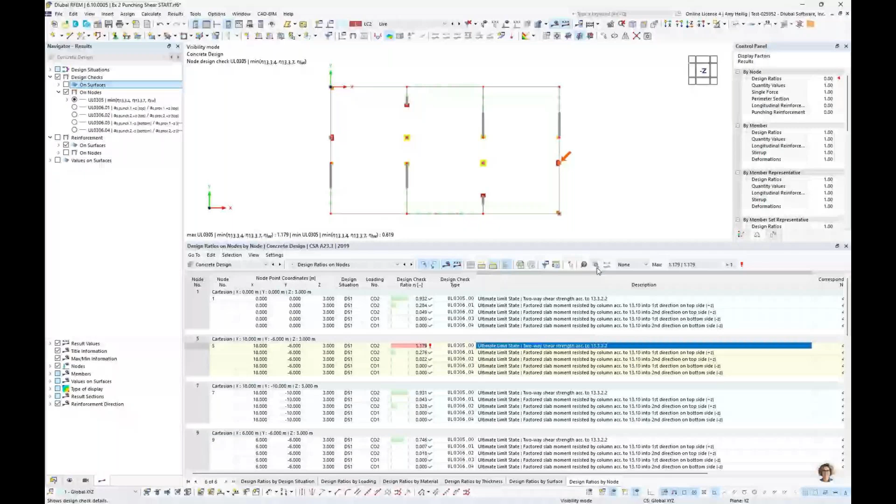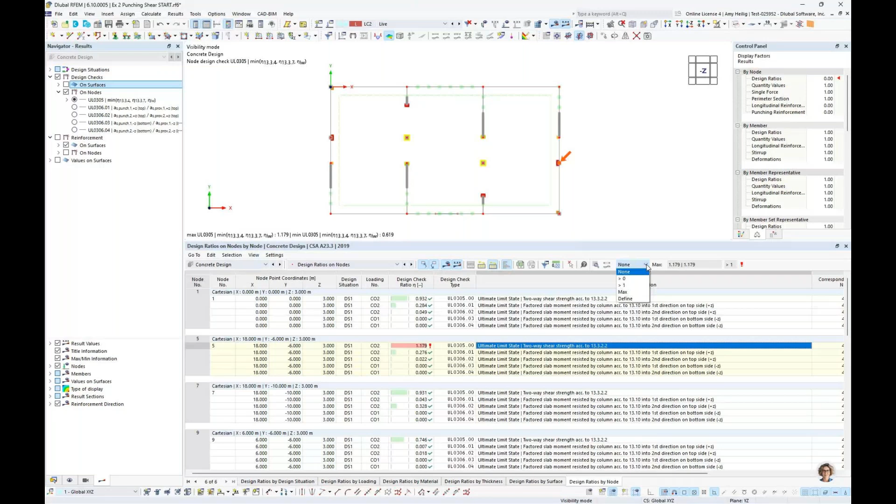Well, when we go into the design check details, we can take a look in more detail at exactly why this particular check is failing. And in this instance, the strength of the concrete is not sufficient for these shear forces. So this is where it would flag us that, okay, we do need to consider some additional two-way shear reinforcement. So some of these nodes are passing. If we wanted to filter here to only the design ratios that are greater than 1.0, we can see them listed here. So 4 different nodes.

So what I'd like to do is to take these 4 nodes and I'll go ahead and highlight them here and we'll create a visibility by only these selected objects. Now they're currently selected in the model here. They're a pink color, but I know that's a little bit difficult for you guys to see. If I double click on one of those nodes, you can see that the 4 that are failing are selected within this dialog box, and we're going to revisit the concrete design punching node tab here.

So instead of no reinforcement defined, this is where I am going to input additional two-way shear reinforcement. So the first input in here is to select my material. Now, in this case, I've already defined here the reinforcing material, but I forgot to mention this. It's always possible here to visit our material database to filter to the reinforcing steel for either the ACI or the CSA standard, or you can create your own reinforcing steel as well.

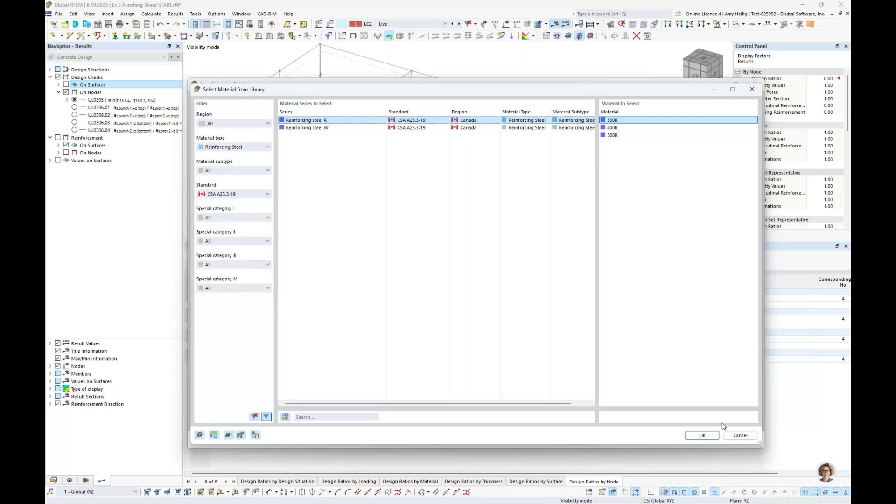We will choose number 10 bars. And then over on the right is where we select the type of reinforcement. It can either be vertical or it can be the headed shear studs, which is what we'll use for this example. As mentioned in the PowerPoint, we'll continue offering more options in the near future with this drop down.

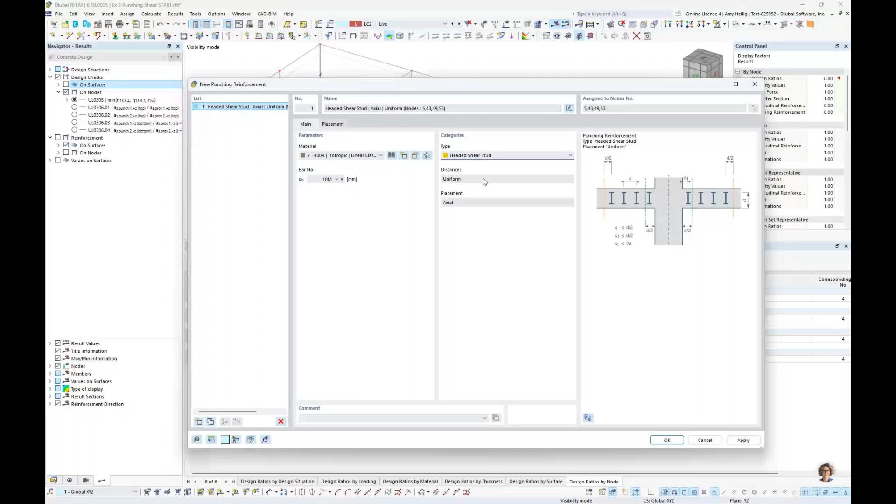Under the second tab for placement, we need to define the number of perimeters. I'll also mention that all of this input is clearly stated with this picture on the right-hand side, so you know exactly what information you're setting. We essentially need to set the number of sets of reinforcement extending from the face of the column, so we'll increase that to 8.

The number of headed studs in each direction for one perimeter is by default set to 2, but we could increase that if we had additional headed studs, again extending from each face. The perimeter spacing can also be set here. This can be just a factor as a function of the surface thickness itself, or we can manually set that, which is what I'll be doing today.

So the first distance is S1. This is the distance away from the column support face to our first shear reinforcement. It's going to be 70 millimeters. And the additional spacing between perimeters will also be 70 millimeters. So now our input is done within these particular nodes. We'll go ahead and click OK.

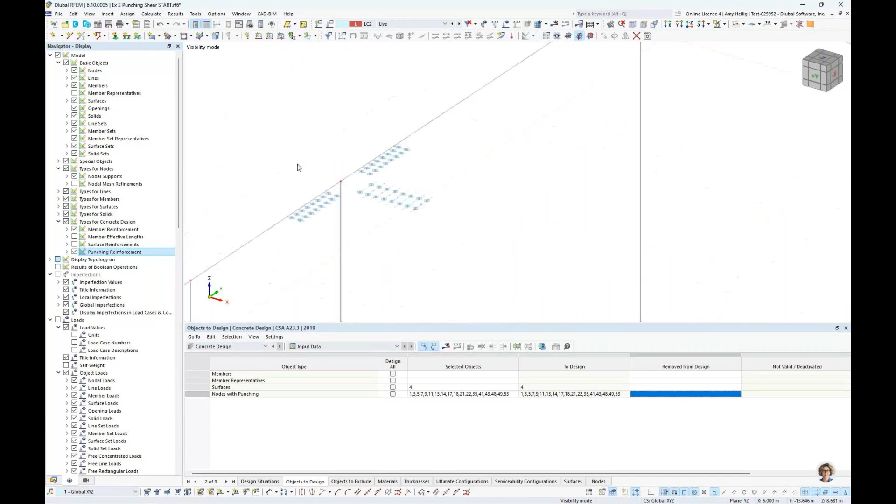I want to turn on the display of my punching reinforcement at the top. Now we can see graphically this punching shear displayed only at those 4 nodes that I've added this to. The program is intelligent enough to recognize the edge of slabs. For example, if we look at this wall element, it also recognizes that we only need the shear in 3 directions. Alternatively, if we were to place shear reinforcement at this single column, we would see that extend in all 4 directions.

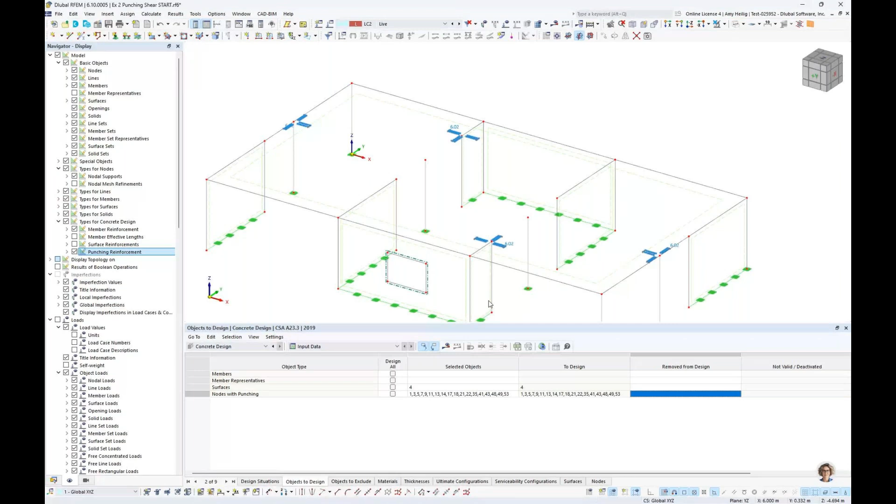Now that the input for the two-way shear is carried out, again directly through the nodes, we want to redesign within the concrete design add-on. I'll go ahead and run this calculation. We don't need to rerun the analysis, so those analysis results are already set. The only thing we're doing now is considering this two-way shear reinforcement for our punching shear checks.

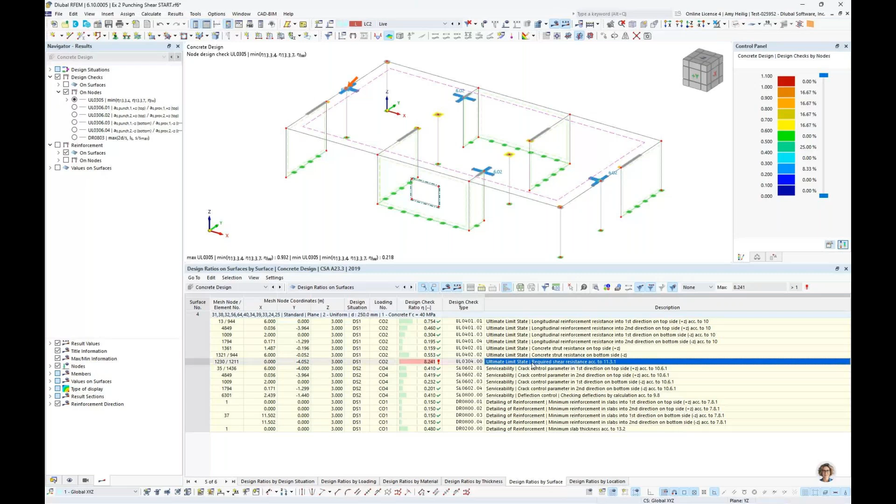Now that this is done, I'll also mention that if we look at the design ratios on the surface, this is unchanged. We still see these high design checks where the column is framing into the surface itself. Again, this is one-way shear that it's checking. We do plan to link the punching shear results with the surface results so that the punching shear will supersede these one-way design checks, and we may no longer see that failing check here. So they're not quite linked yet, but that is something we plan to do in the near future.

Let's drop down to the design ratios on the nodes, and what we should see now are all of our ratios passing for each one of the nodes we have designed at this top location. If we click graphically on this particular node, which includes the column framing in at the edge, we can see that what previously was failing for this two-way shear strength check is now much lower, 0.218. So perhaps we could optimize our shear reinforcement further to get a little bit higher design check.

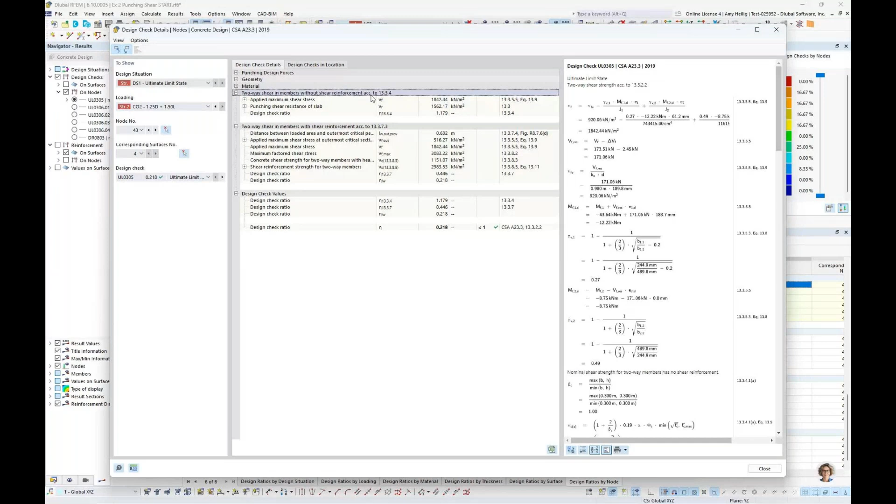We can also visit the design check details here. We still carry out the design without the shear reinforcement and give you this information, but now we're seeing all of the additional design checks, including the shear reinforcement. The program will eventually output our controlling design check being the minimum of these. So everything looks good there in table format.

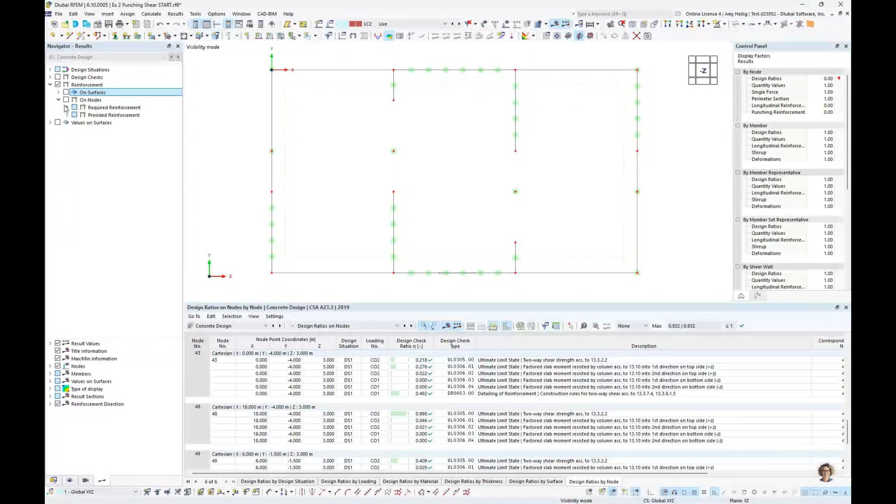We also want to take a look at plan view, and I'll go ahead and turn off the punching reinforcement. Back under the results in graphical view, rather than looking at the design checks, which we could certainly activate for punching shear, let me create a user-defined visibility for only this top surface. We want to display the reinforcement on the nodes that includes the punching shear. Here is the required reinforcement from the analysis, telling you that at these 4 nodes, which we were already aware of, we need additional punching shear reinforcement. Then we can toggle to the provided punching shear reinforcement.

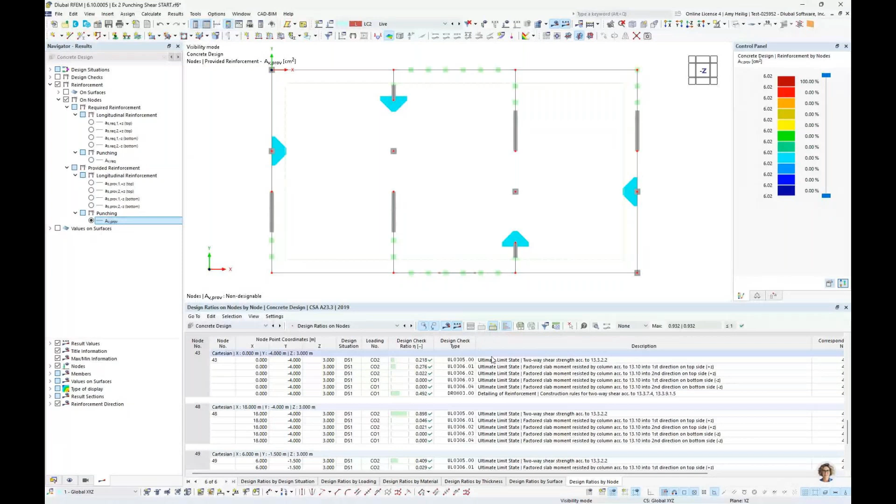As we'd hoped, the provided is greater than the required, which is why we are now passing these design checks. There are additional design checks here beyond the two-way shear strength that utilize the longitudinal reinforcement we set for our surface. This is why I mentioned inputting the surface reinforcement at the beginning of this example, because that reinforcement is also used for punching shear checks, and we can see all of those available here in table format.

Looking at the required longitudinal reinforcement here for punching shear in both directions at the top of our slab, we get the required reinforcement in color-coded ISO lines here also for these nodes. If we toggle to the provided reinforcement, we want to ensure that this is greater than the required longitudinal reinforcement. If it's not, we would want to go back into the surface element directly and maybe specify additional longitudinal reinforcement only at these locations where we're carrying out punching shear. I thought that was worthwhile to mention here, that it's also important.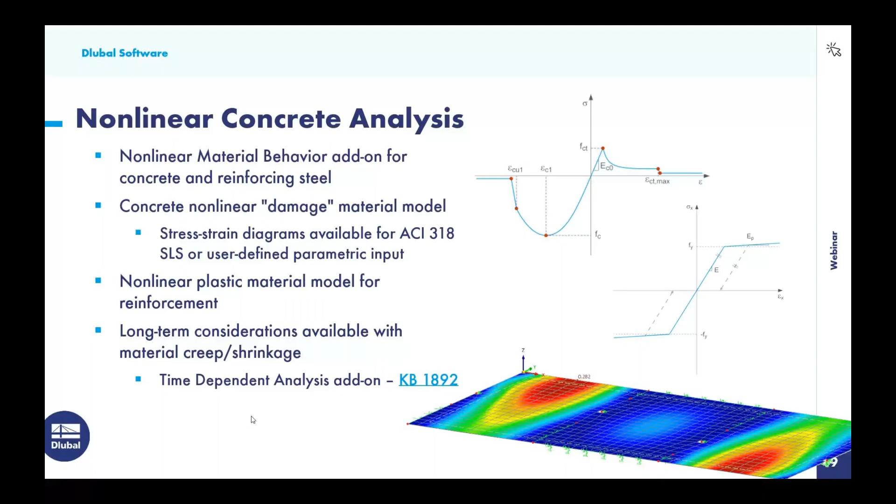So going back to RFEM then for our final example, we have here just a general surface element, and this should actually look quite familiar. This is the same as example number 2, but I have only modeled the surface element itself, and what you'll see here is I'm representing the walls with a line support. A cool feature in RFEM for our line support option is we can go ahead and set here a stiffness via fictitious wall. Under this second tab, we can input the wall dimensions, the wall material, how it's connected to the surface, and the program will automatically calculate the support spring stiffness for these various degrees of freedom and apply that directly to this line support.

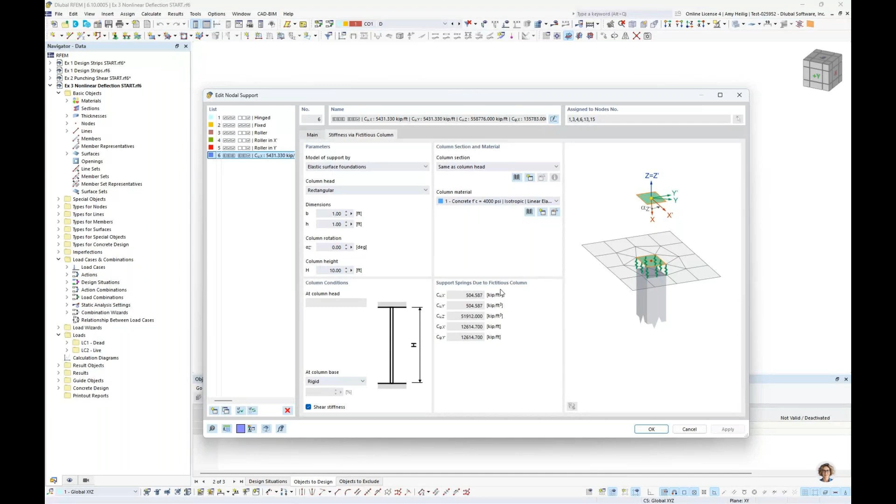It's the exact same concept here for the nodal support. I haven't actually modeled these columns in the program; rather, I utilize this stiffness via fictitious column. Sure enough, here I have the ability to define the dimensions of the column, the material, how it's connected, and the program automatically calculates these stiffness parameters for the nodal support degrees of freedom. Just a nice feature again, if we're carrying out two dimensions here rather than modeling all three dimensions.

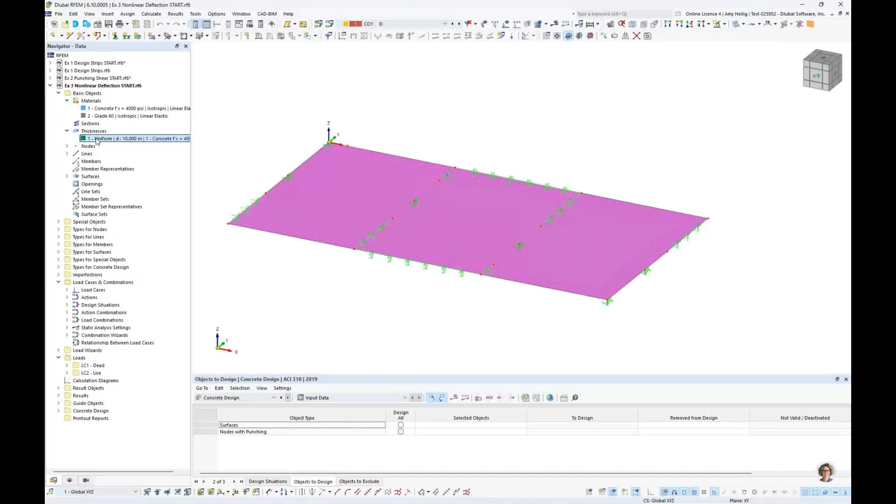This particular example, we moved back to the ACI and imperial units, but again, everything is possible with the CSA as well. To begin, we have just a linear elastic concrete material here, 4,000 PSI. I do have reinforcement grade 60 linear elastic material as well, and the thickness of this particular surface is 10 inches. I also have the concrete design add-on activated where I have a surface reinforcement input in here. This is going to be number 6s at 6 inches on center in both directions.

If we go to the base data here under the name of our model by right clicking, we have under the add-ons the nonlinear material behavior. So we'll go ahead and activate this add-on within the model.

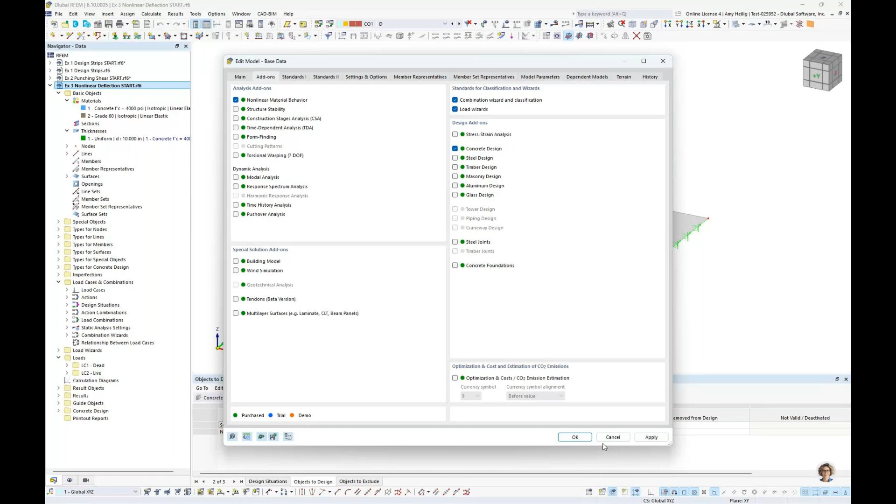Before we get into the materials, just quickly on loading. This is identical to the previous example, with a simple dead plus live load. We also only have the unfactored load combinations considered here for deflection checks.

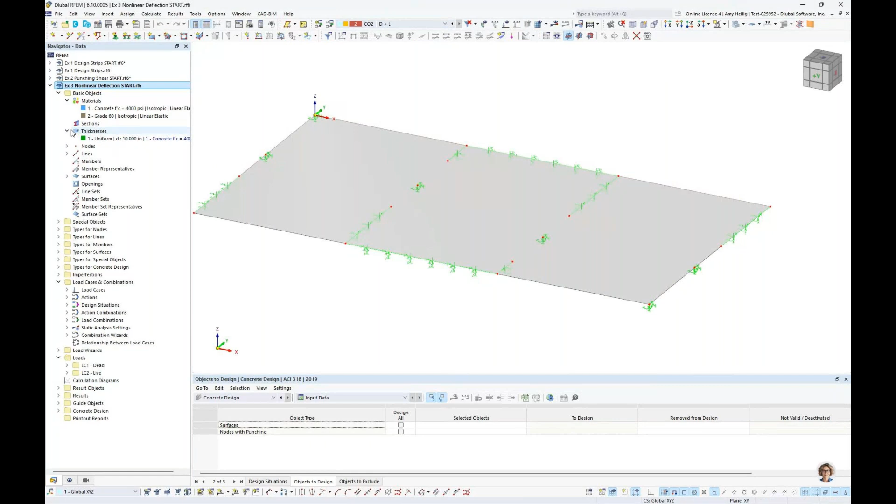Now that we've activated the nonlinear material model, we're going to take a look at the materials under the material dialog box, so we can go ahead and edit those.

We have here the 4000 PSI concrete linear elastic. I'd like to make a copy of this, and because we've activated the nonlinear material, we now have the anisotropic damage material model available, with some additional tabs we can run through.

As mentioned in the PowerPoint, this is where we define the stress strain diagram. Currently this is set to SLS, referring to ACI 24.1, but we can also modify this to the parametric input, if the standard isn't very clear for some of the nonlinear calculations we want to carry out.

We also have the ability to directly define the stress strain diagram. With the SLS option according to ACI, we'll leave these as the default options shown here, but of course we'd want to modify them specific to our material.

Notice we can consider tension stiffening, or turn this off, and the diagram updates accordingly. Under the stress strain diagram, we can see these values output in table format, and we can hold control and use the mouse wheel to zoom in for more detail.

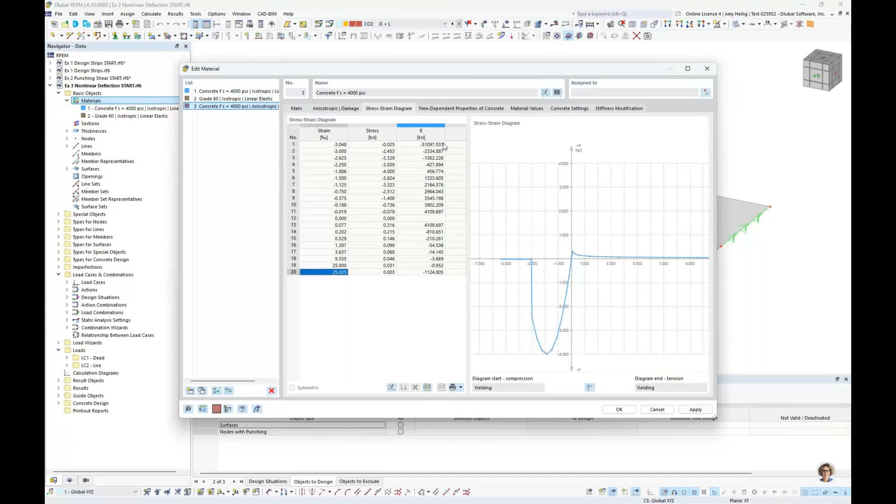The time-dependent properties let us account for creep or shrinkage. This isn't necessarily needed within the nonlinear add-on we just activated, it's available for general concrete materials, but the time-dependent analysis add-on isn't being utilized today. Refer back to the knowledge base article for more information on this simplified approach to consider creep.

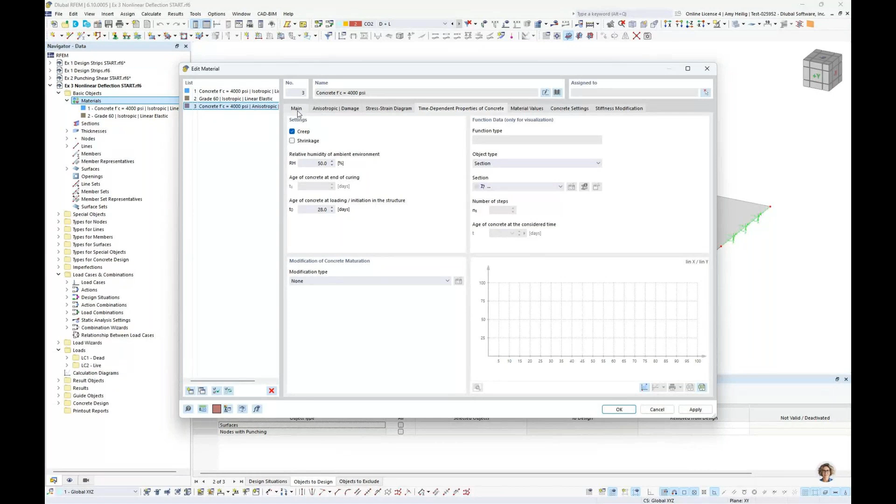Going back to the steel material, we want to make a copy of this too. Instead of linear elastic for our steel, we modify this to the plastic material model. Much simpler than the concrete, we have our stress strain diagram with the yield strength set to 60.

When I click OK, you'll notice these two newly defined nonlinear materials are blue because they are not applied to the model yet. Rather, we're still utilizing the linear elastic materials.

Going into the load cases and combinations dialog box, I've deactivated my factored load combinations, so we're only looking at the unfactored ones. I'll rename this one to ASD linear, then make a copy and rename that one nonlinear.

Identical load combinations, but one thing I want to do with the nonlinear load combinations is come into the combination wizard options and make a copy, because this is where I want to activate a structure modification. This should sound familiar, since this is where we applied the I-crack factor back in examples 1 and 2, but this time it allows us to activate the surface reinforcement directly within the analysis.

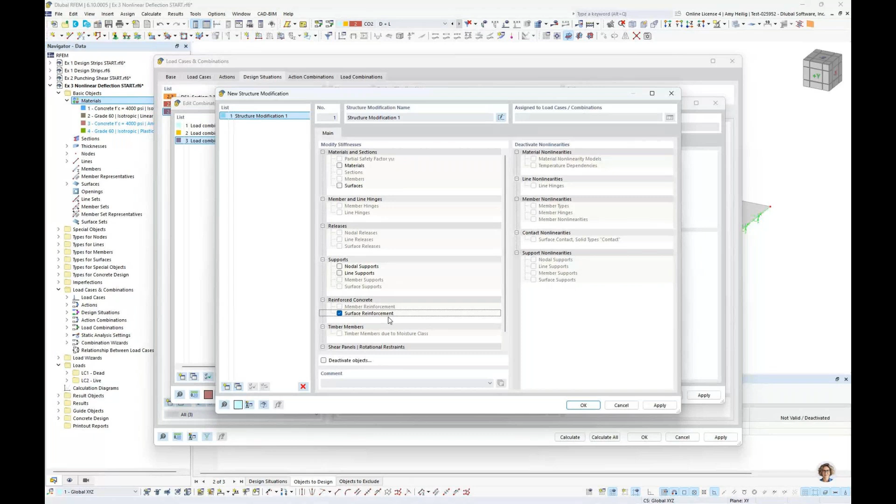Previously, without activating the structure modification, you couldn't consider the surface reinforcement in the analysis, but with this change we now can. Once this definition is set, we make sure it's selected from the dropdown, and we also have this tab for the selection option for different materials.

This gets a new tab that allows me to swap out materials for specific load combinations only. So in my nonlinear load combinations, I'll take the linear elastic material and swap it out for the nonlinear concrete material, and swap my linear elastic steel out for the plastic material model for steel. But for my linear load combinations, I'm still going to use the linear elastic material.

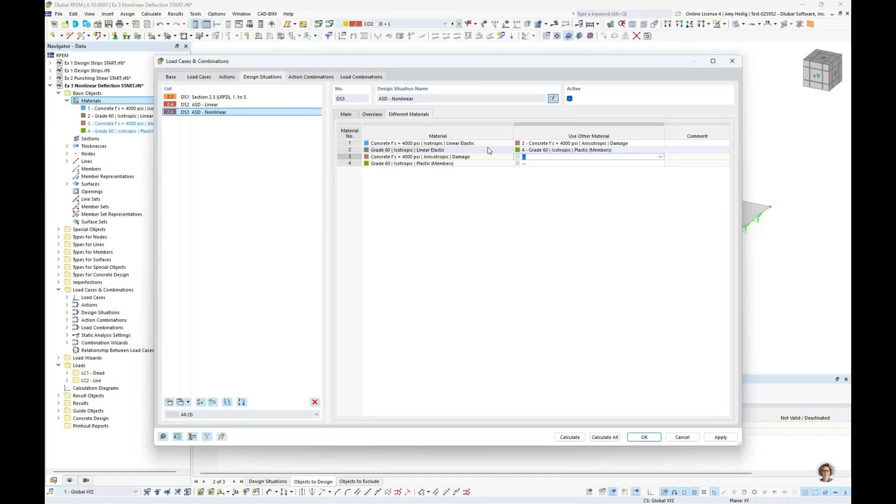So this is a really cool feature in the sense that we don't even have to use it for something so complicated as nonlinear. But let's say we're trying to compare a structure of 4,000 PSI concrete versus 5,000 PSI concrete. We can actually swap out those materials for only some load combinations versus others, compare the results without having to build two separate models. So that's the purpose of this checkbox here.

Under the load combinations now, we can go ahead and toggle to this. We see here our linear load combinations listed, and then we also have our nonlinear load combinations with that structure modification set. The additional thing that we need to make here is the static analysis change to take into account that creep that I have just activated for those nonlinear materials. So when this is done, we can go ahead and click Calculate All, and the program will cycle through both our linear analysis as well as the nonlinear analysis.

And what we can compare immediately is the global deformations. So when we turn to the dead plus live load here, we see the max deformation of our slab as 0.183. But then we can drop down to toggle to the dead plus live for the nonlinear load calculation. And we see here a new deformation of 0.417. Again, considering the reinforcement in the analysis, considering the nonlinear behavior, the creep, you can see how different our deflection could look for those analysis results.

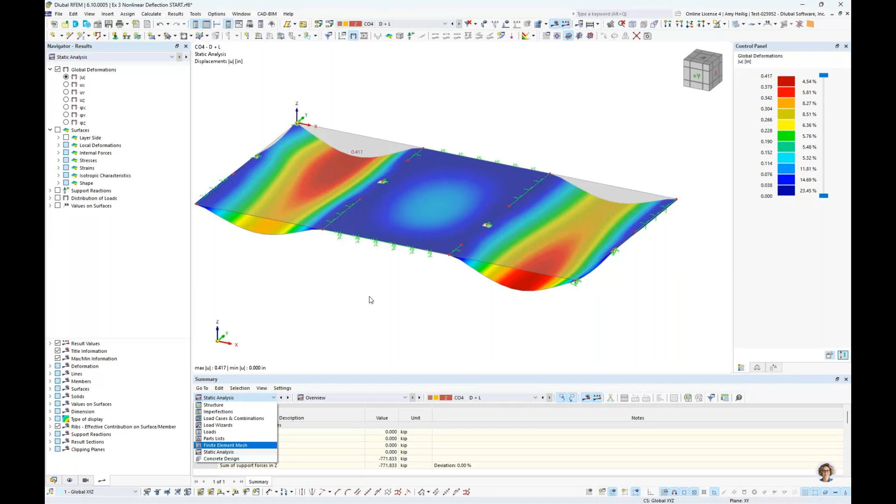Now, currently, the nonlinear capabilities of the concrete are not linked quite yet to the concrete design add-on. It is only used for analysis purposes, but we'll see in just a minute some of the future developments that we do have planned for the program RFEM and the concrete design. So we'll go ahead and conclude our webinar today just to briefly mention some of the future developments.

So we will very soon release the design strip twisting moment consideration MXY. So currently those design strips are only considering moment in the one direction, the length of the strip itself, but we will have an additional option to also factor in the twisting moment. Again, that's a high priority that will be released soon. We also want to integrate, as I mentioned, the nonlinear concrete analysis results with the concrete design add-on, currently only available in the base program RFEM for the analysis only.

So switching gears away from kind of the add-ons that we talked about today, we are also working on the foundation design add-on. So isolated foundation design for ACI is currently in development. We hope to release that a little bit later this year. The CSA standard will follow, as well as additional foundation types later on.

You also can consider the pre-stressing effects in the static analysis with the tendons add-on. This is a beta version, so if you're interested in testing that out, again, not linked to concrete design quite yet, certainly do so. And also advanced ACI 318 seismic design checks. So we're talking about strong column, weak beam. We do give some seismic design checks now for detailing, but this will certainly dive into more of those strength checks for seismic.